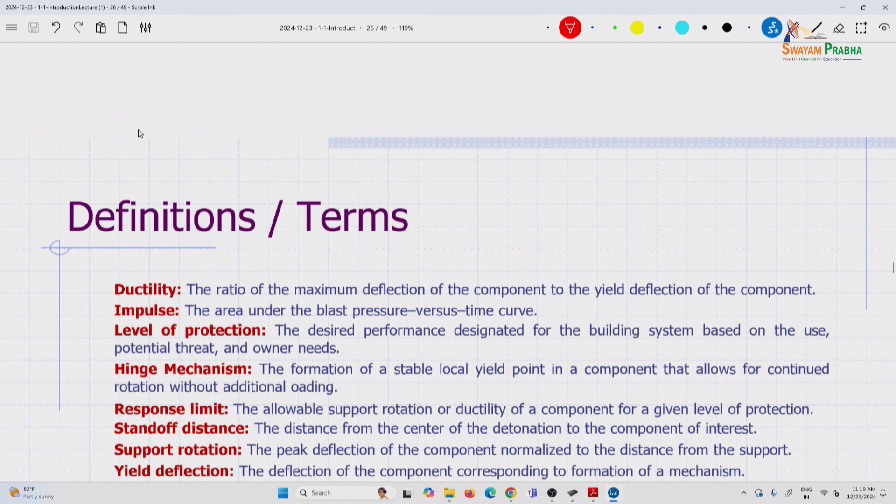All right, welcome back. So this is actually a very important slide with lots of terms that you'll hear over and over again.

So we've looked at the definition of ductility, but the way ductility is defined, in this case, you see that if you have any structure, let's say this is a load versus deflection response, whatever be the type of load, it's not necessarily dependent on the type of load. So if the response is something like this, then you have your behavior, again it is on the response of the structure.

You can also predict these responses, so whether it is experimental or predicted, either way. So you have this, we will call it delta yield, and this is the maximum that it can withstand. Here we will use the ductility as mu, which is delta max divided by delta yield.

So that's the definition of ductility ratio, and you can have this for even concrete structures, and for masonry type structures also, although the ductility ratio, as I said earlier on, concrete and masonry don't have a well defined maximum deflection. So in those cases we go into support rotation, which we will address later on.

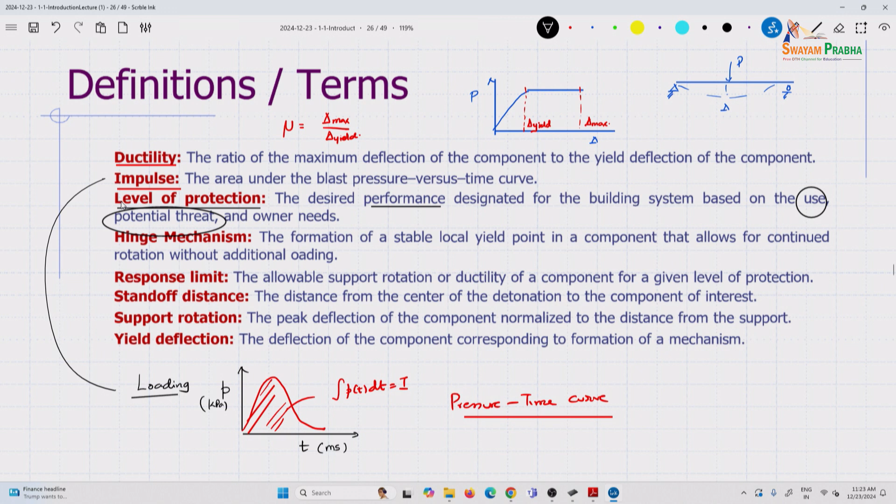And that is a part of our afternoon example as well as your tutorial, and owner needs. We will, at least from our engineering perspective, define what the threat is, and based on that threat you can go with levels of protection.

Then hinge mechanism. This is very standard, as you see in all steel structures, even concrete structures. You can have formation of a plastic hinge. I think this is something all of you would be quite familiar with.

Then you have response limits. So just like serviceability criteria, you have delta dead load should be less than the span divided by, I don't know, at least in the US we use dead load plus live load is L over 240, or delta live load is less than L over 360. In this case, the response limits are the actual rotation or ductility.

The support rotation, as I am coming to it later, but let me give it, we will call it theta, and the ductility is mu. Mu would be applicable especially for steel type of structures. Theta would be more applicable for concrete type of structures.

We have seen what the standoff distance is. That picture did not come out very well. All buildings, as you will see, let us say this is your building and this is your explosive. The standoff threat distance is the perpendicular distance between your explosive and the building, and of course that is how you design it.

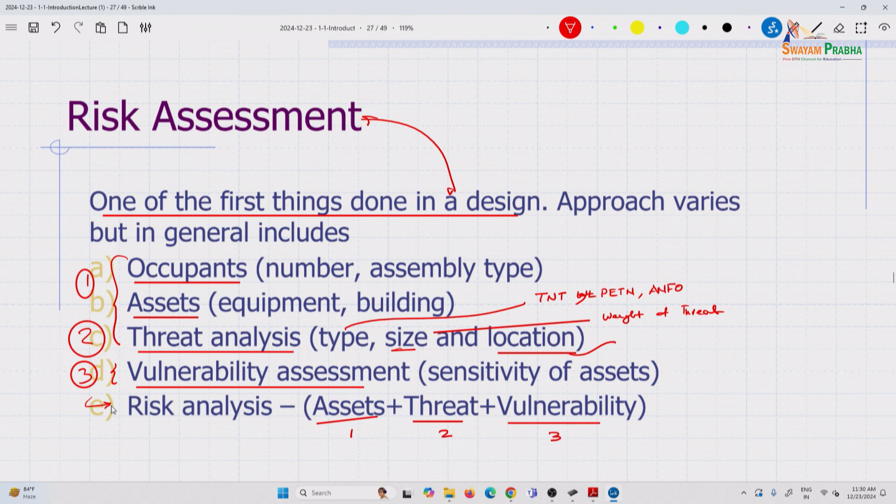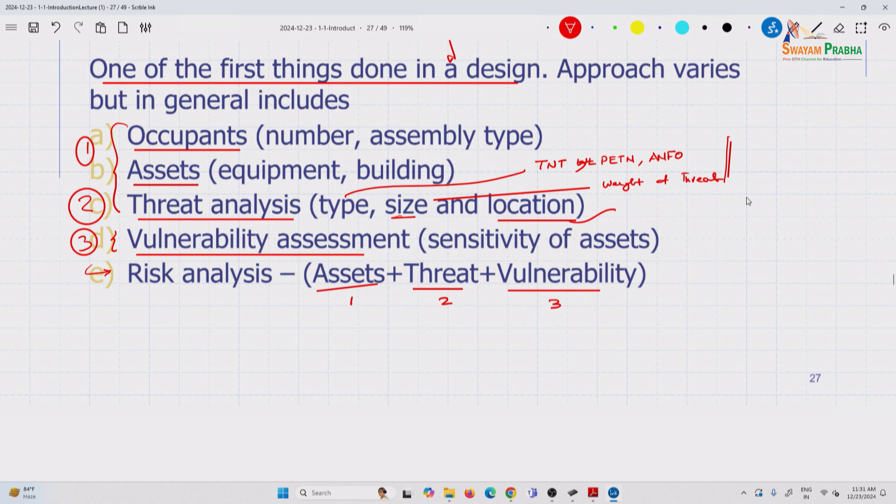But before we get to that, there are a lot of other things to look at. These levels of protection are classified under what are known as performance expectations, called LOPs. As you begin to see the distinction, the first thing is defining the threat, then vulnerability comes into play - the LOPs is a part of the vulnerability assessment of the structure.

It is part of the risk analysis. So there are, how is it classified? Just like in seismic, you can't have too many categories, it is quite broad based, and one person can do a different analysis compared to another - so there is subjectivity involved in this.

So you have low and medium LOP, we call this LLOP or MLOP. This is major damage - when you have a low level of protection, you can expect much higher damage, so there is major damage to the building. Then medium LOP is moderate damage and it is repairable, and then you have a high LOP which is repairable with very minor damage. This is of course much more costly - cost considerations definitely. As you see, going this way, you have increasing cost considerations.

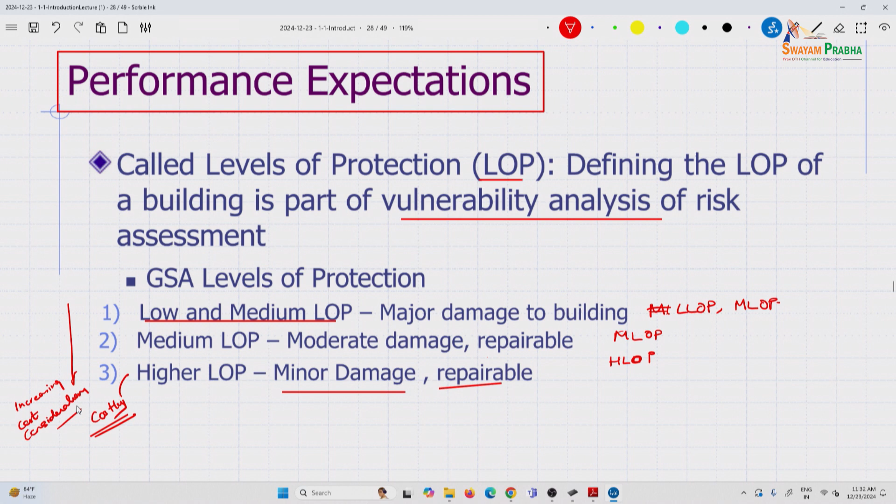So this is the document from the UFC 4-010-01. You have various levels for new and existing buildings.

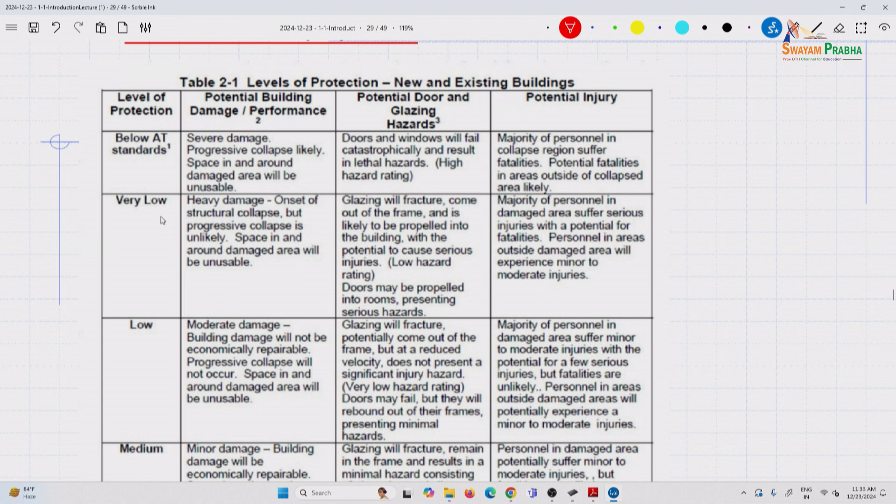As you see, this is levels of protection below anti-terrorism standards, and it defines the building damage performance, what can be expected from very low. There is also a very low category, low, medium. So you have here VLOP, LLOP, and these are distinct.

So there is a broad basket classification of what you can expect. For example, in high LOP only superficial injuries are likely, whereas in low LOP the majority of personnel suffer minor to moderate injuries. So being familiar with this is important.

If you see a low LOP, it does not mean the building or the personnel inside are not protected. Here, if you see, the damaged area personnel suffer minor to moderate injuries, with potential for a few serious, but fatalities are unlikely. So this is LLOP.

So here, of course, below anti-terrorism standards, even in the lowest category, this is very low protection. The majority of personnel suffer serious injuries with the potential for fatalities.

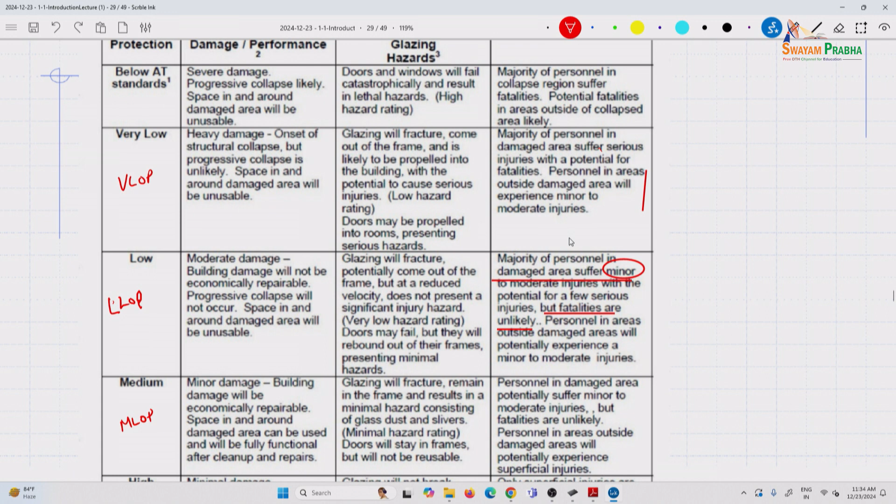Areas outside the damaged area will experience less. So in the vicinity which experiences the peak, you can expect fatalities. Outside of it, probably not.

So be familiar with what is contained in some of these charts.

So what are the overall analysis and design steps? Defining the parameters: threat, basically the size W and location. R is the standoff distance. So those are the two things. This is what is known as the design basis threat, DBT, as I mentioned earlier.

Then based on the DBT, once you have these two, we'll cover all this over the next few days. We define the loading based on the threat. Once you have W and R, how do you define a pressure-time curve for it, and how do you translate that to buildings as well?

I know one of you mentioned you're a mechanical engineer, and a lot of these are design basis, so we have to convert what you see physics-wise into civil engineering type applications. Thank you for mentioning that, I'll focus a little more on that side as well.

Then, once you have the loading, modeling of the structural elements as single degree of freedom, SDOF, models. This is also something we will be covering. We will go through all these steps perhaps in the first week, or maybe into Monday as well.

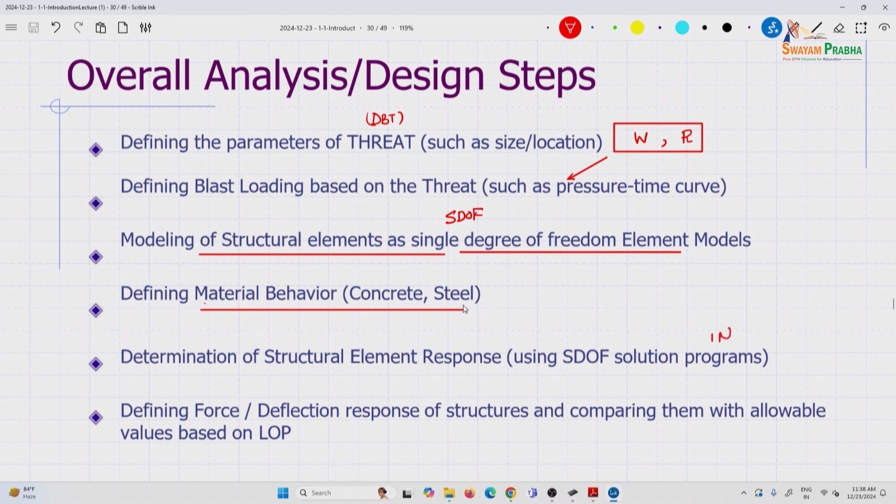At the end of the day, what we are doing is extrapolating. Those parameters are good for interpolating, but when you start extrapolating, you're on your own, right? So although it can be one of the most challenging aspects, for this course we'll keep it quite simple. Designers love to do that.

And then determining the response, and this can be either from an advanced analysis, using an SDOF solutions program, or performing advanced analysis. When I say advanced analysis, of course you're using finite element methods, and then you're defining a force-deflection response.

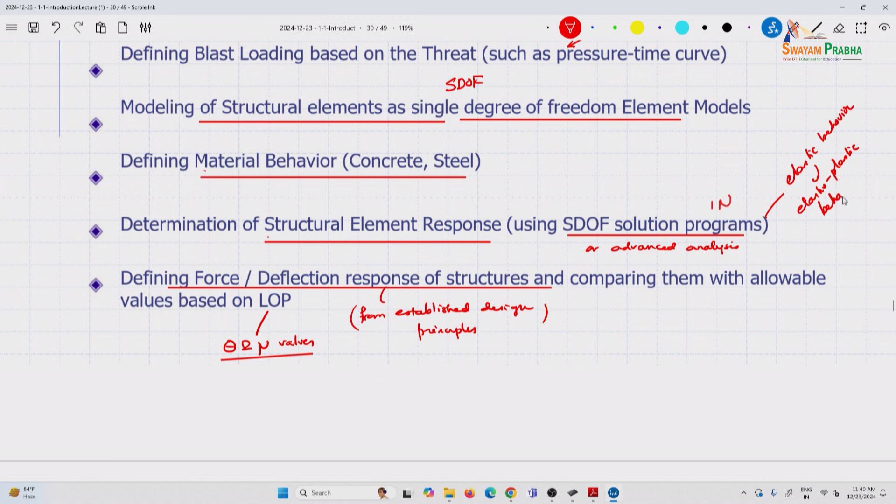So I think in all of this it's good to consider - and once again a disclaimer, I am not an explosives person. I collaborate with a person who works in mining engineering, and all they do is study the physics of explosions under whatever conditions. But given that, in this area you need to know at least some basics.

Physical sources are CNG cylinders, of course, that we know. In fact, we will see later on that the progressive collapse in fact began from a cylinder - an LPG cylinder blast, not CNG, that was an LPG cylinder.

And it collapsed an entire multi-story building. It happened at some floor well above, and then you can see how the collapse occurred. So that is something that led to progressive collapse. We'll look at that later on.

So that is either cylinders or a violent mixture of chemicals, and some of the most common is ammonium nitrate fuel oil.

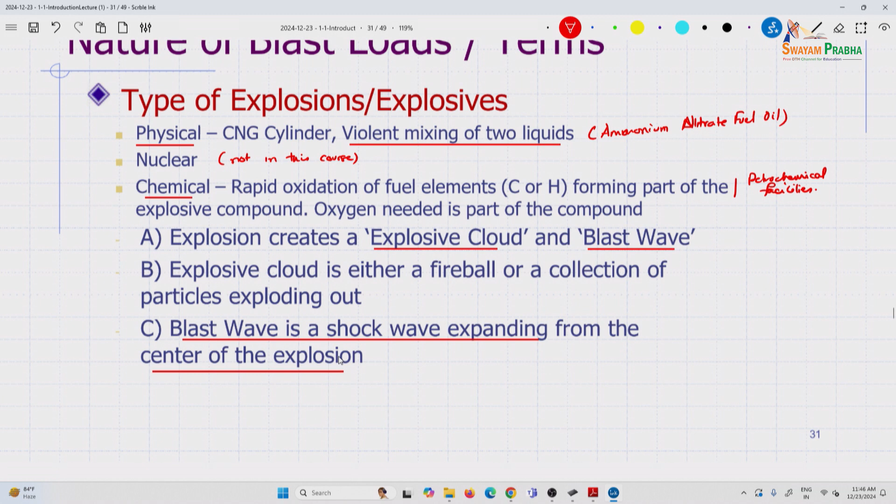Explosive, then the blast wave is a shock wave expanding from the center of the explosion. So there are categories of explosives: homemade or military grade. Homemade, for example, ANFO, and obviously they will be limited. The Oklahoma bombing, I showed you a picture of it, this was homemade, and we saw the amount, but that is not purely because of a blast, it's part of it, and then there's progressive collapse involved also.

And then of course you have military grade, and even in military grade you have a couple of different varieties. You have low explosives and high explosives. So we call this LE and HE.

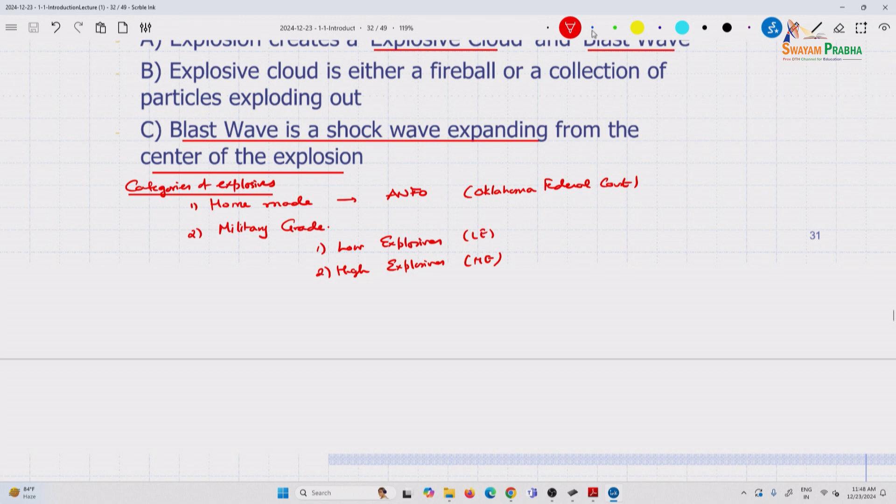Then even here there are two types of explosion. This is an explosive, but when you look at the explosion itself, one is a deflagration. In this case, when you are mixing these two, there is detonation, and there is a rate of detonation, it's a chemical reaction. In a deflagration, the rate of detonation, the velocity, the speed, is lower than the speed of sound.

And then you have the LEs. In this case, this is a little bit higher, so there is a rapid burning and flames involved, and sometimes it's difficult to put a number to it. It's often a range that is specified, whereas HEs cause what is known as a shock wave. When you have burning, pressure builds up and goes down, so the time over which it occurs is much larger. Whereas with HEs, the time at which the detonation occurs is extremely high. So that is the difference between what is categorized as HEs and LEs.

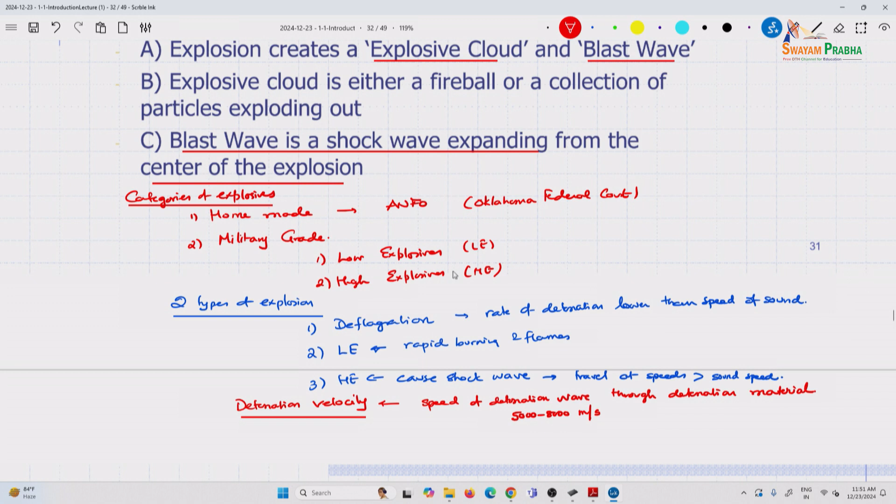HEs in particular cause heat, a lot of heat, then of course a large amount of energy, and it also creates strong blast waves.

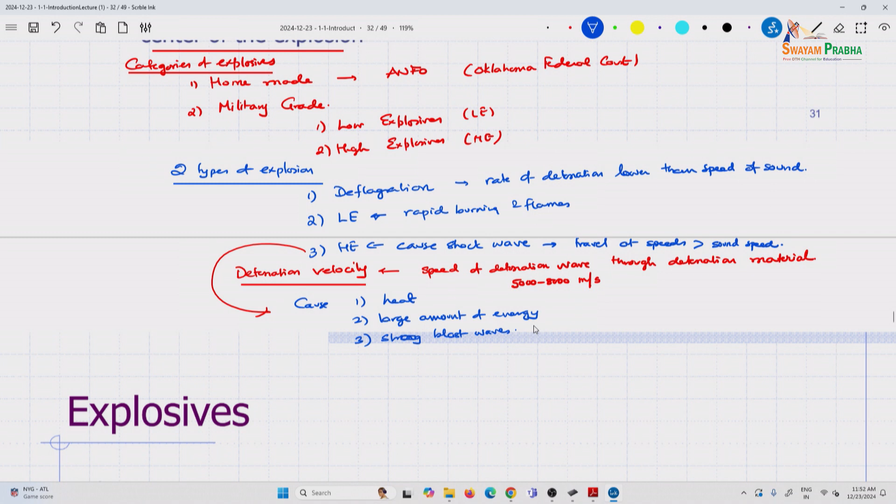So we'll go a little bit more into it now that we have an idea what they are. HEs, high explosives, are bombs, mortar shells, even bullets, for example, are considered.

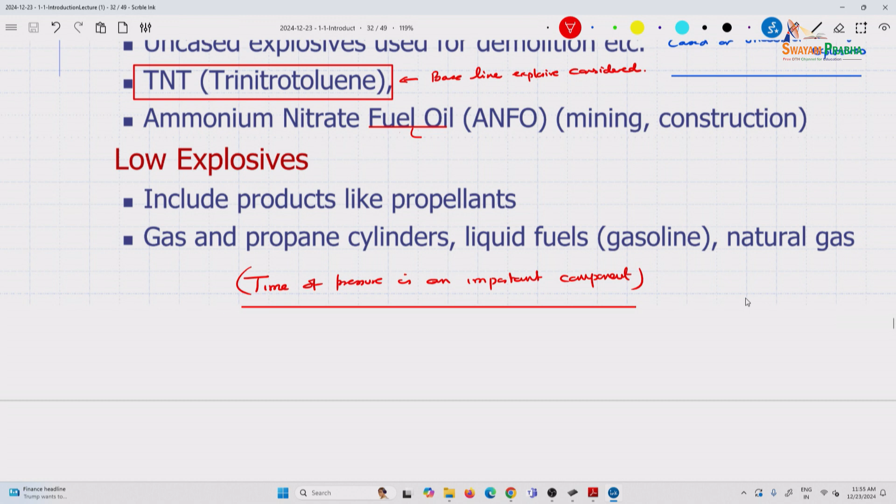Unlike any other type of loading, some of the principles from this course are fascinating even if you never work in this area — it's exciting to see structural behavior from this side. I was never exposed to these kinds of behaviors and concepts in my graduate, PhD, or even undergraduate studies. It's hard to cover these things in a curriculum, so expect to see them over the next few days.

High explosives release energy by detonation. Just to give you an idea of the energy, let's call it Q, the specific energy — measured in kilojoules per kilogram of explosive. For TNT, it's approximately 4500 kilojoules per kilogram.

Then there are others — for example, one explosive is higher, about 6400 kilojoules per kilogram. There's another explosive called RDX. Don't ask me who uses what, under what circumstances, and why — I go by what's in the literature for different types. So if you're asked to design against these, knowing these numbers or finding a table from your sources is important.

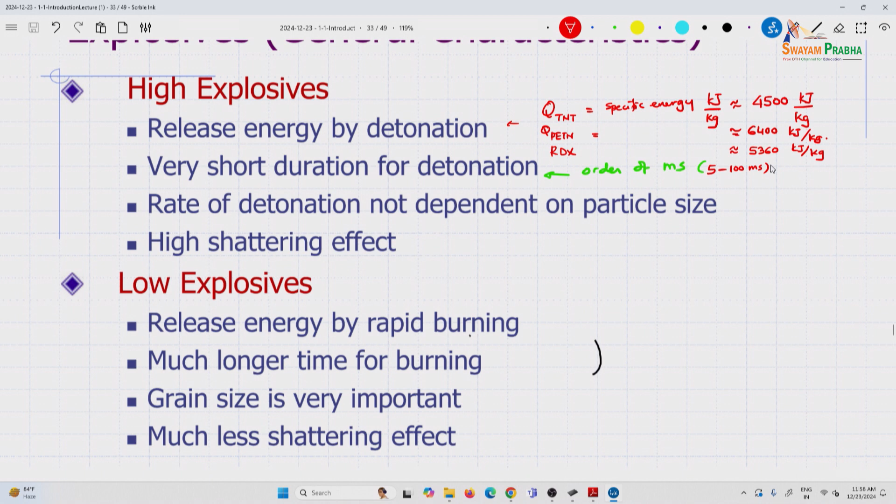The rate of detonation is not very important, not dependent on particle size. It does have a high shattering effect. The main difference is release of energy by detonation versus release of energy by rapid burning — that depends on the amount of oxygen available for burning.

Rapid burning happens over a much longer time, on the order of seconds. So the pressure generated has to be applied over a longer period, even 10 to 20 seconds. Later on you'll see how that plays into the response of the structure. There are some really fascinating aspects in this course, especially early on, that I'm excited to present and that you'll be excited to learn about.

Grain size is important too — within the detonation or explosion itself, it has much less shattering effect. This is more like prolonged exposure to load, not exactly wind, but something like it. Pressures are very, very high.

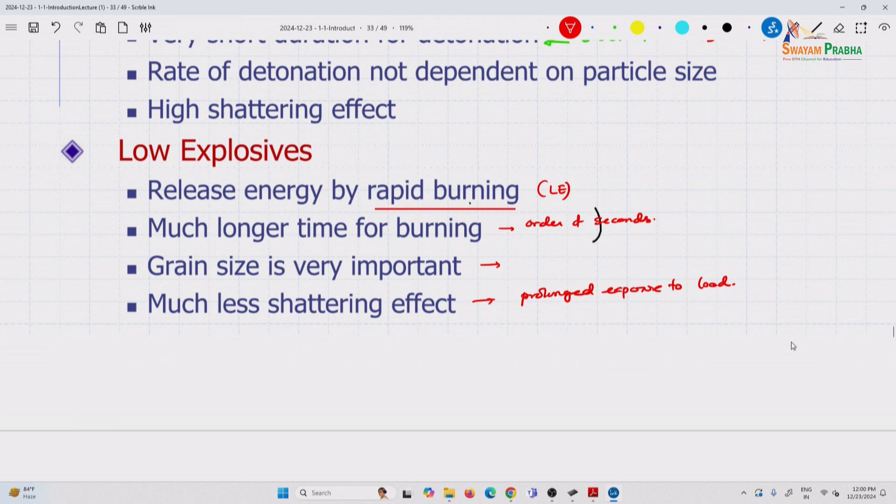Let me think in terms of PSI rather than MPa, just to get the order of magnitude. Say you're designing this building, this classroom, for a certain load — if you were designing the wall for a blast load, what is the ratio of the pressure difference? Just the magnitude of the pressure difference, what do you think?

Consider bridges fully loaded with trucks back to back — if you calculate, they'll be on the order of even less than 1 psi. For example, we design for live loads of 200 pounds per square foot; let's put it at 144 pounds per square foot — how much is that in psi? 1 psi, right? So compare that to tire pressure — maybe in MPa. Do you have any idea how much? Have you filled air in your tires? About 30, how much?

33 psi. What is the load on a building? Less than 1. So look at the difference in that, and that explodes out, right? So start thinking in terms of that shift, in terms of scaling.

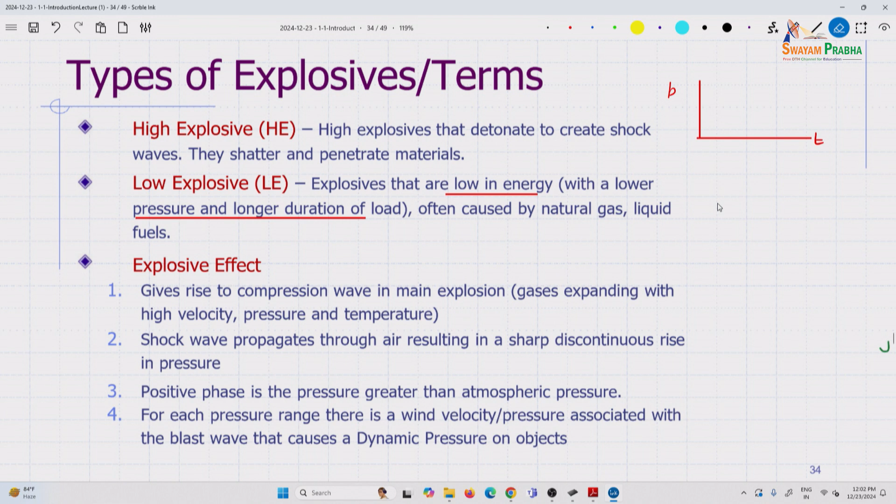So for example, if I were to plot these two, pressure versus time, I can plot them in the same graph. This would be more like this, where this is HE, whereas this would be LE. So you see the areas could be the same - this is the area under here. But the peak, there are 3 variables involved, and we'll talk of all those.

One is dependent, of course, and so how that affects the response, those are the things we will be covering. So what happens, what does happen physically, what happens in an explosion? Let's say you have a TNT explosion here.

Instantly it gives rise to a compression wave in the main explosion. So there's going to be, just like sound, right? Sound travels - I'm giving a compression here, and it travels to you in the form of sound waves. So in a similar way, there is instant compression, and not only that, there are gases involved. I'm not pushing out so much, just a sound wave, but here you have gases expanding with high velocity, pressure and temperature.

So this results in a shock wave. Instant rise is the shock wave. It propagates through air, resulting in sharp discontinuities. So when you saw the picture, you saw it goes and instantly comes - those discontinuities, and then that's the positive phase, where the pressure... so you actually have your atmospheric pressure.

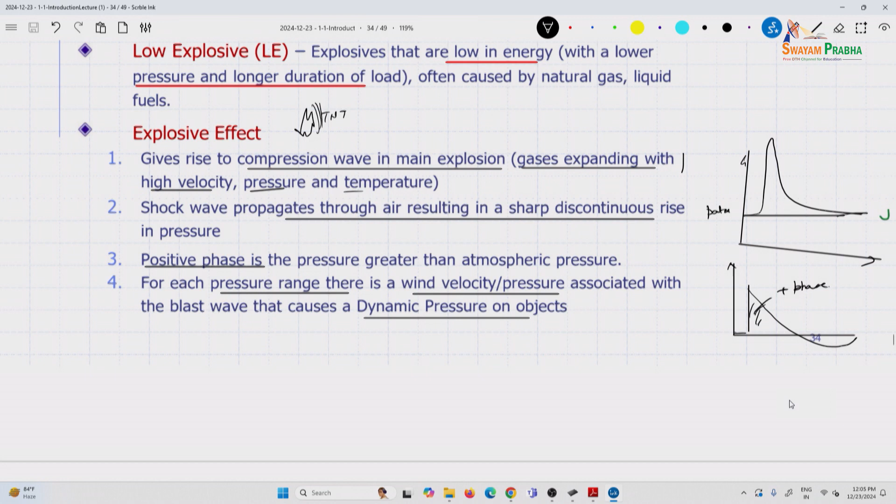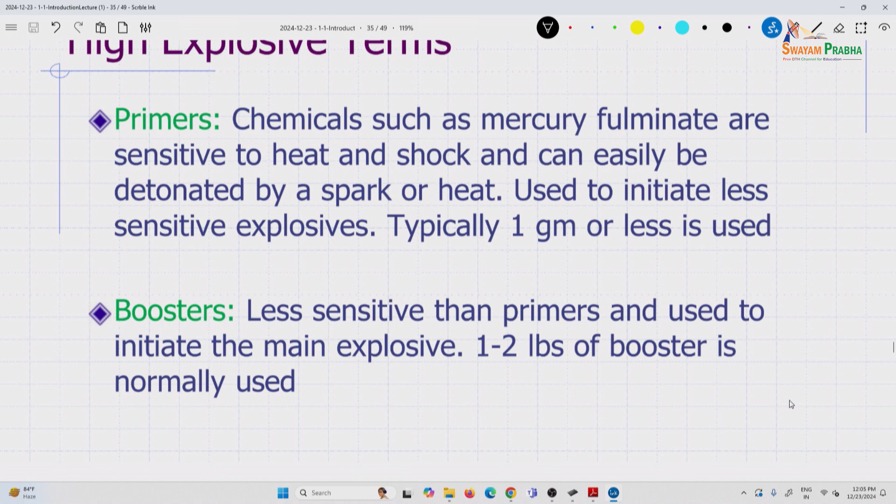This is something I do not really focus on, but just for you to know, you have different types of chemicals, primers and boosters. So we will not spend time on that.

I think we have talked about this, but let me just give you a little - I wanted to put this as a review, so to speak.

So with the booster you have a compression wave. The compression wave, we have seen, goes at the speed of sound. Then if the compression is sufficient, the chemical initiation of the chemical reaction will occur due to elevated pressure and temperature conditions. We know those are needed for chemical reactions to take place.

That is one way, and the reaction is very rapid, which causes a detonation wave. Then the detonation wave goes through the material itself in excess of the speed of sound, depending on what type of explosive material you are using. We have looked at 2 or 3 different names, we have not looked at them in detail.

Then that wave from the material reaches the interface between the explosive and air. So that is where the gases then expand with high velocity, pressure and temperature, and the boundary between the hot compressed gases and air is defined. Then behind this boundary, pressure and velocity sharply decrease after it passes through.

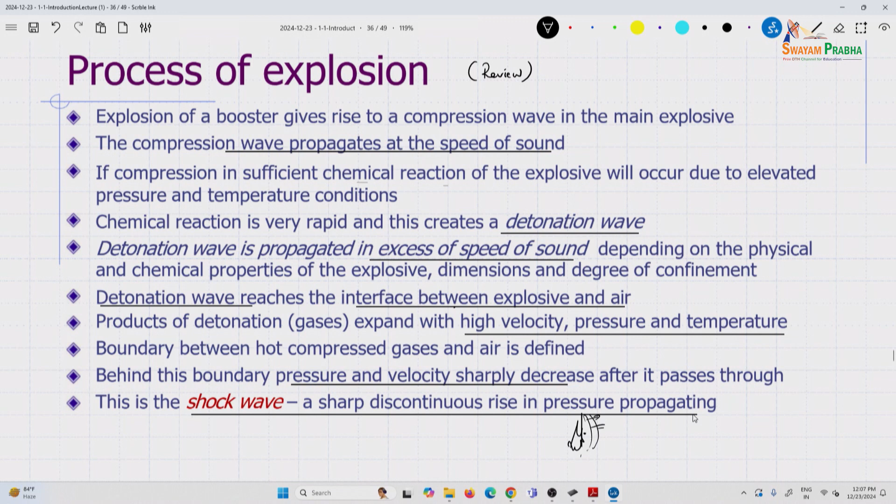So this is your explosion - let's say this is your boundary, and then the wave goes, and after it propagates in this region, it drops down very quickly. So this is the shock wave, and there is a discontinuity associated with the rise in pressure propagating. Do not ask me too many questions on this, I might not have an answer, but you understand the basic process, right, at least aware of it.

So shock waves are large amplitude pressure waves produced by an explosion and faster than the speed of sound. A blast wave - this is the dynamic - again, some of these are just to review.

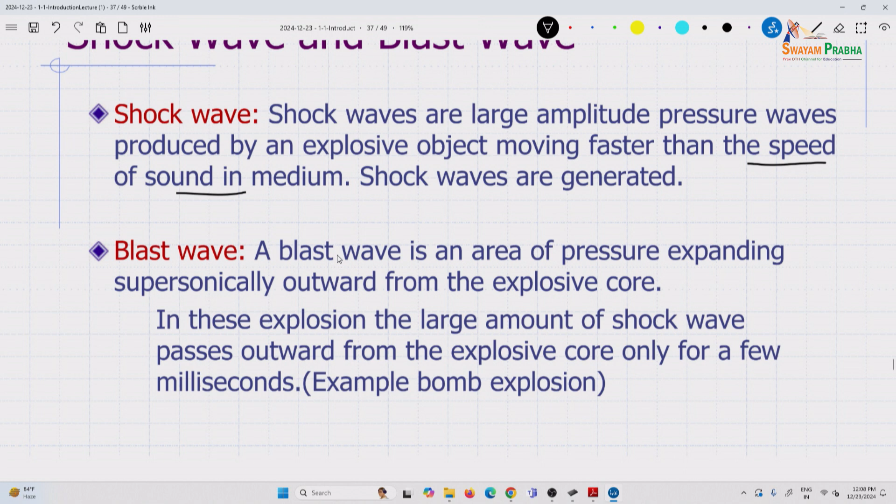In these explosions, large amounts of shock wave pass outward from the core in a few milliseconds. What are the magnitudes of pressure that is generated? What are we talking about in this case? This is extremely high. Gas pressures can go 10 to 30, not just megapascals but gigapascals, but luckily by the time it arrives outside into the air and comes into the structure, it falls down into megapascals, but they are still very high.

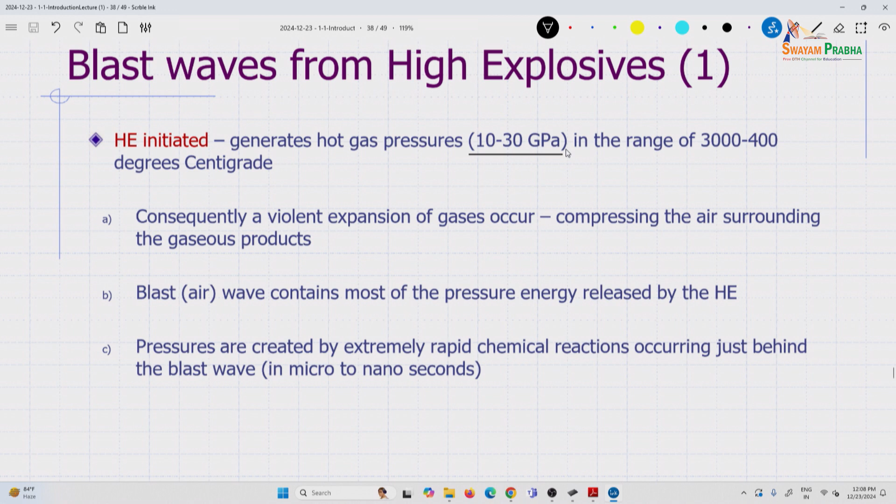I think most of it we have covered, we can move forward. I will give you all of this, you can read through it carefully, but I do not see anything new in this. Once again reviewing the two things we have talked about in terms, we have talked of deflagration.

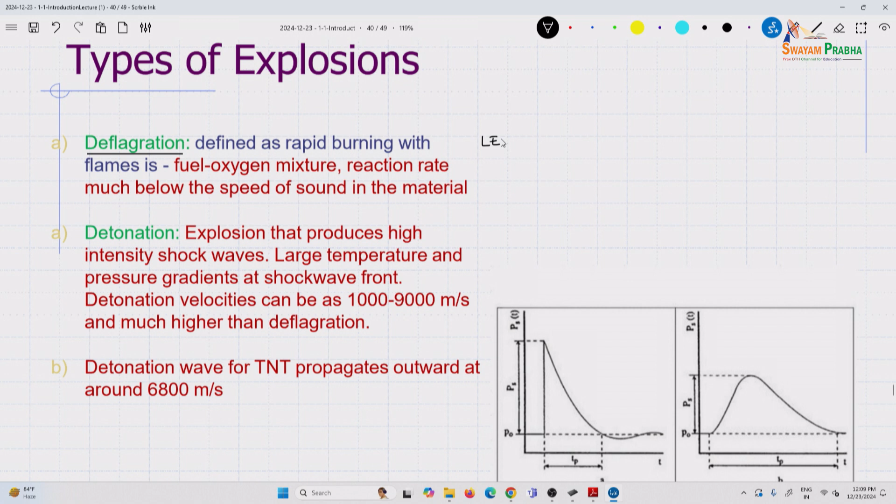This is again in low explosives. Basically this occurs, and if you look at it, this is the pressure time curve for deflagration, and these could be of the order of 0 to 10 psi peak pressure. Whereas here, detonation - this part is the detonation - this can be of the order of about 50 to, in our experiments we almost went even more, 100 psi. What is 1 ksi? About 7 megapascals. So you can imagine this is 0.7 megapascals or half of it.

Explosion that produces high intensity shock waves, velocities - this is something we calculate. We'll see later on in buildings, it is important to note that the detonation velocity itself is not important, but the velocity of propagation can be important.

Note some numbers - this is at 6,800. So when you do calculations, you're asked to, nobody is giving you answers, especially in this field. In a lot of other books, you can turn the page and find an answer in the back and feel good that you've done it right. But in this field, there are no answers. You only have to gauge yourself. So how do you know you're right, or at least in the ballpark? Looking at numbers and units. That's why I'm highlighting some of them.

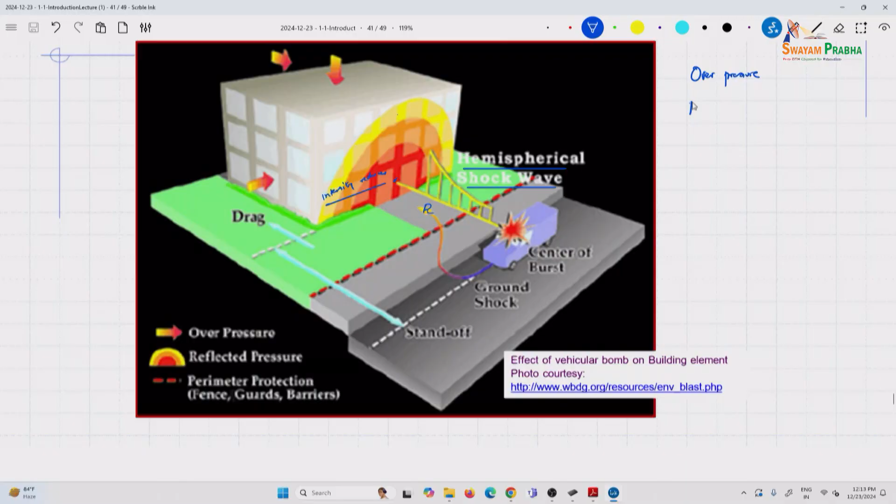So if you're overpressure, it's called PSO, or this is PR. Reflected pressure can be much more than overpressure - orders high, not just 1.2, 1.3, it could be 5, 6, whatever the case may be. So in the front face, this is the front face, and we will do examples of all this - you see that you have overpressure, and so you have PR. PSO is in air, but reflected pressure is in the front.

Now on this side, then there are these structures. Actually, if you take a circular structure versus a rectangular structure, and then there is blast - this is blast. Now this tends to reflect back, this is PR. Now here there is diffraction. We do not need to specifically go into it, but the behavior is going to be very different. So that is why it is recommended - it is sometimes hard to predict what happens due to diffraction aspects of it.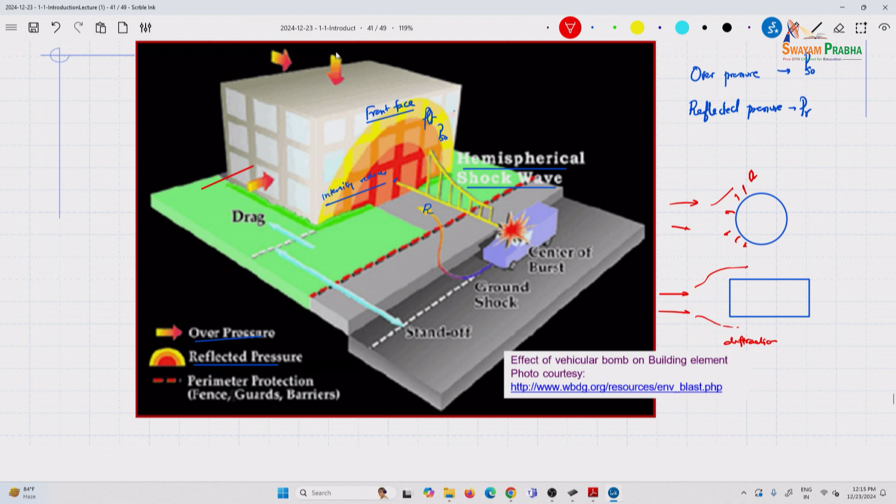So here, now notice everywhere it is into the structure, and these are just overpressures. We called it PSO. This is PSO. This is PSO.

This in the back wall is PSO, so only the front face is experiencing it.

So when you are designing anything, and this applies to any mechanical structure, imagine any structure you want to resist these effects. You should recognize that is why you analyze bomb effects in different locations, because you want to protect everywhere. Like let's say it is an armored vehicle, then you analyze where it is, but recognize that depending on where it is, you have reflected and side-on pressure. Is that distinction clear?

What is the difference between the two? So overpressure, let's say this is the structure. Detonation is just, so up to here it is overpressure. Then once it hits the building, there is reflection. So the building is moving because of, if it is not stiff, less reflected pressure. If it is very stiff, but you will see that when we calculate it, it does not depend on the stiffness of the building. We will assume it to be a rigid structure. So that is what is reflected.

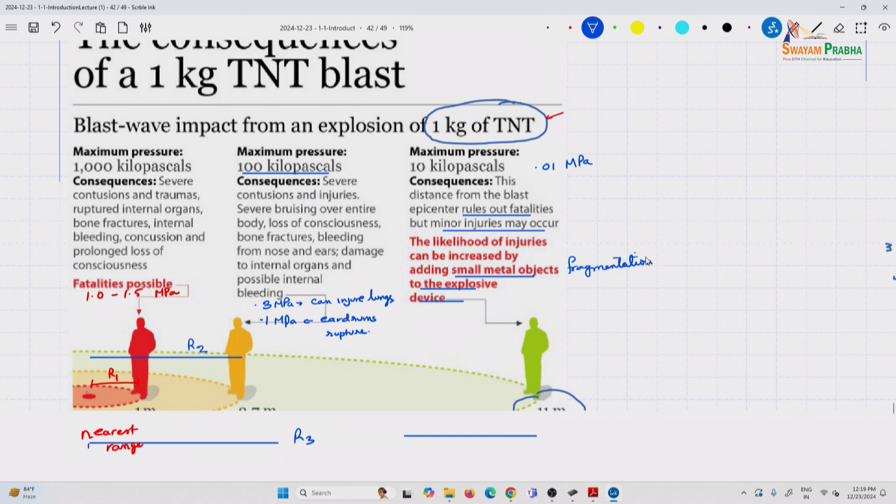So just to give some numbers to keep in mind, this is important especially if you are designing against, to protect. So there is designing to prevent, again levels of protection, but when you come to higher levels of protection, contents inside are human beings and you want to protect ears, what should you reduce it to? You reduce it, this gives you some ideas of the actual numbers. As you go along this course, keep these in mind, as Professor Aragappan said, but if you're taking notes, I would take notes on the numbers, those are more important.

Here is an interesting point, and should also mention that 12:45, no? No, what, it goes till? 12:43. Okay, we're going to be way behind, but that's okay, we'll go as we go.

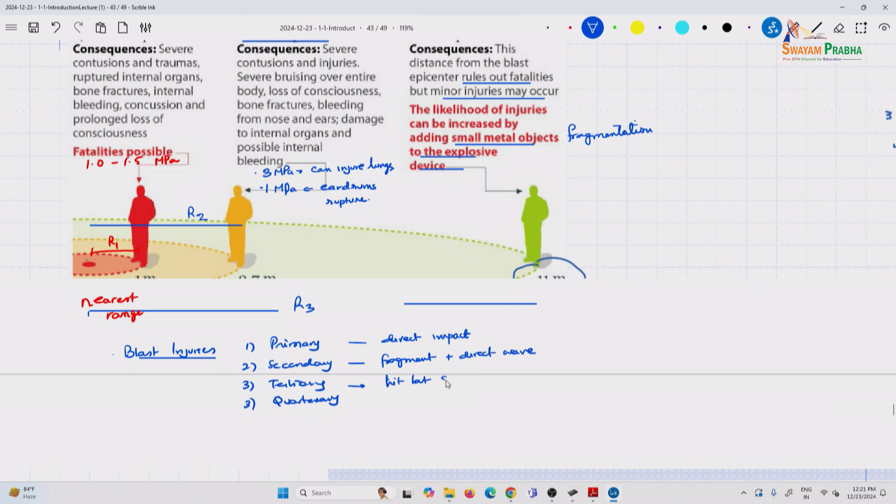So you have here blast injuries. They are primary, secondary, tertiary, and quaternary, fourth. Primary is direct impact, secondary is fragmentation plus direct impact, then tertiary is this thing hit by surrounding objects. That's why when you design, all these things matter, for example glass, that would be glass breakage. And then quaternary, these are from inhalation, these are biological effects.

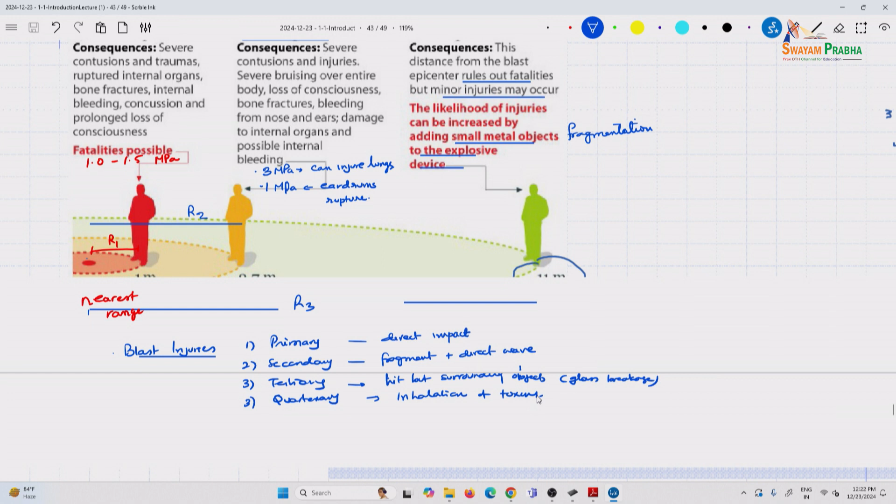So when you're looking at protection, you have to present a comprehensive package. As you're seeing, the picture is already broadened. What is surrounding? What is my glass type? All these, it's not just structure alone. So this is again from the UFC 3-340-02, we'll get familiar with this.

So here you see, this is your explosion at a height, this is the ground. Now what you have here is also called the incident wave, this is the first shock wave. And then of course the angle of incidence we talked about. Then what happens is the incident wave is coming, it comes here, and then what happens at the ground? Ground reflection, right? What does speed of sound or speed of a wave depend on?

In terms of medium, what metric? The density, right? So air has a certain density. Same thing even in seismic principles - if you have soft soil, your seismic wave speeds change rapidly. Same principle here: when it hits the ground, it reflects with much higher intensity.

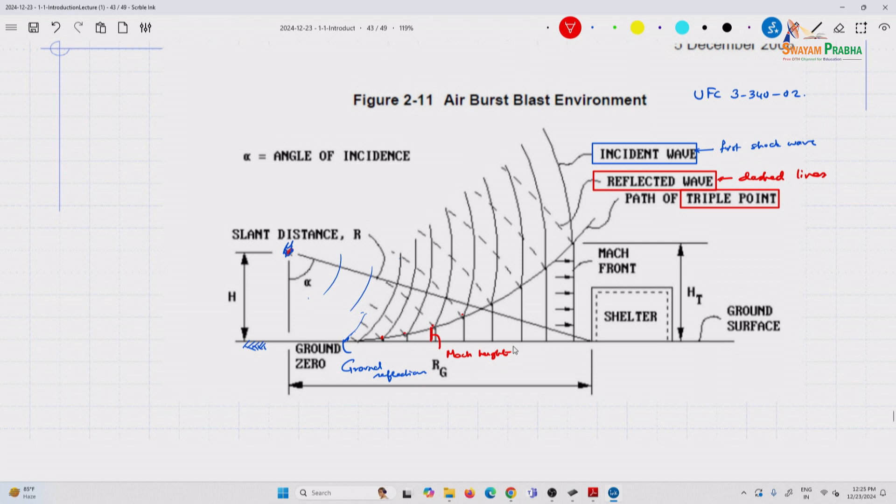The path of the triple point, and this height, is called the Mach stem. This phenomenon is studied in explosive engineering - if you're interested, you should spend some time looking into it. It was studied, these concepts were proposed over 100 years ago. Many of the equations we use are perhaps over 100 years old, if not more. I was talking to Professor Aragappan about the basic mechanics of understanding the fundamentals of these topics, because they haven't been studied a whole lot.

So that's what is called the Mach front, and it depends on where the building is, where it hits the structure. Fortunately, we are not going to be looking at some of these things in detail. If you are doing advanced modeling techniques like finite elements, you have to start considering, depending on the type of modeling you use, reflecting boundary conditions versus non-reflecting boundary conditions. But for this course, you don't need to worry about that, but you should definitely know these terms - the Mach front and the triple point.

The whole idea - it's difficult to design, but let's say an ideal goal is to design a structure to avoid the Mach stem. The Mach front or the Mach stem are about the same thing, and this is actually also called the Mach reflection.

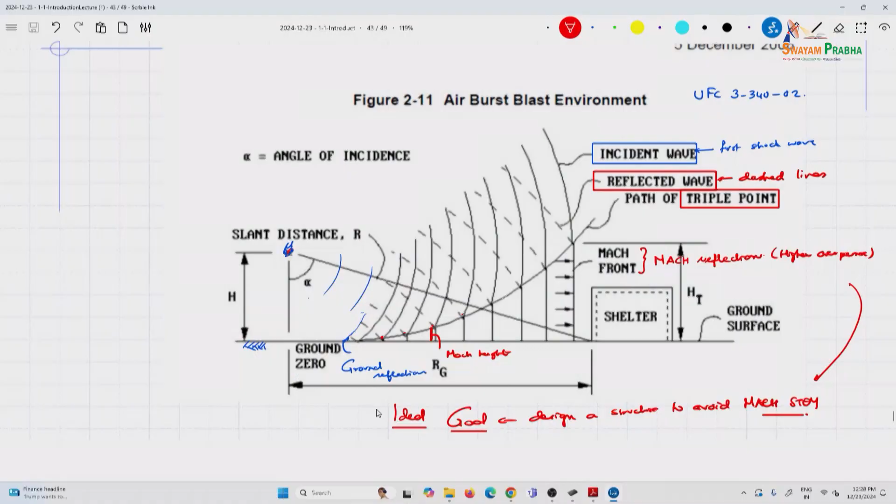That's why curved shapes actually reflect better. Convex shapes, as we suggested, reflect much better, but piers and columns involve both reflection and diffraction - anyway, those are part of regular design. So I seem to be talking a little ahead of the slides, but it's good to review.

So Mach stem formation occurs when a blast wave reflects off the ground and the reflection catches up with the original shock front, creating a high pressure zone. Anything in this area experiences peak pressures several times the peak of the original shock front - that's why you want to avoid it. So your side-on pressure can be much higher here.

A structure - and that leads to your question about whether you can calculate this. Maybe that's something this course has evolved toward; next time I should include some calculations. I'm not prepared for those now, but I think that may be a good example to add in the future, if the height of the triple point exceeds the structure height.

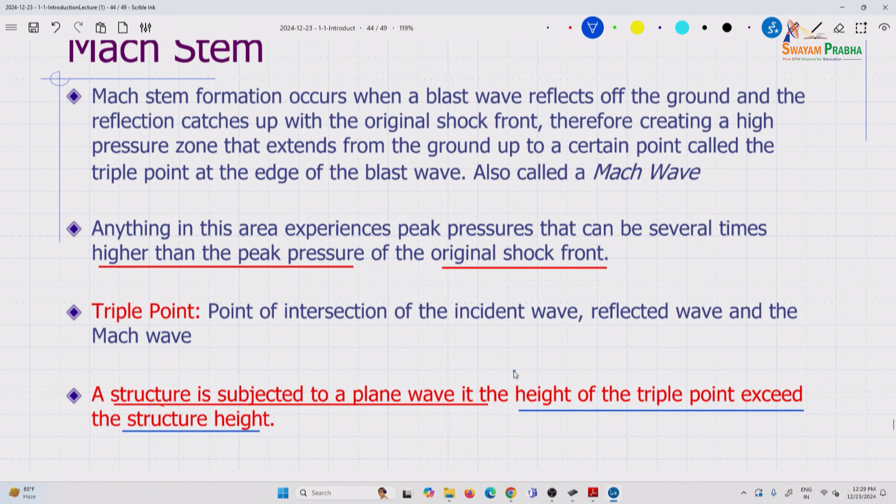So we've seen three things, right? Negative pressures also, because there's suction behind - those are the positive phase, then you have the negative phase, and we'll go through all of this. We've also talked about dynamic pressure, the pressure due to wind velocity associated with the blast wave. We'll see how to calculate all of these.

So again, your wind speed is calculated based on your wind pressure, based on the wind speeds. That's what this corresponds to, the particle velocities. What is your overpressure and particle velocities? So if you want, this can be used.

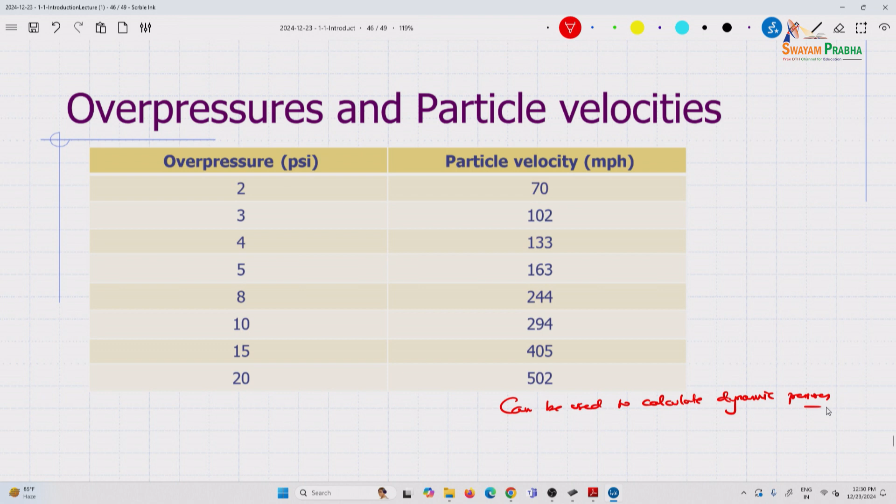But we will do failure overpressures for buildings. This is again from a published paper, I should perhaps have the full reference. So it gives you overpressures in PSI. Keep in mind 1 KSI is about 7 MPa. So if we think in terms of units, that makes more sense. So 1 PSI is how many? 0.007 MPa or 7 kilopascals.

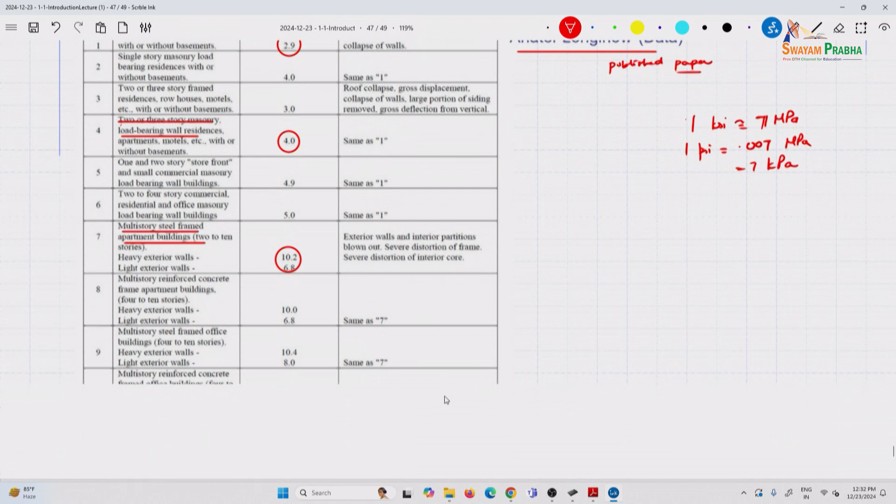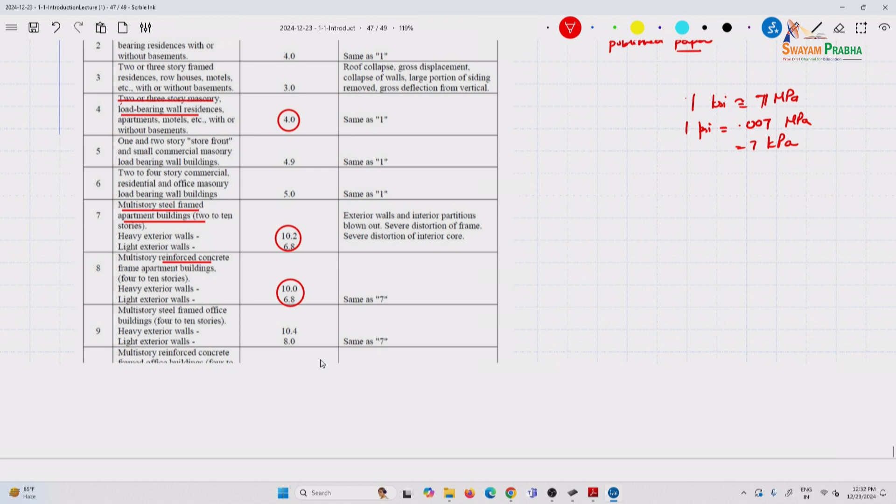Just to give an idea: two or three story framed residences with or without basements, overpressures of 3 cause roof collapse. Then 2 or 3 story masonry load bearing walls, overpressure of 4 causes roof collapse. Again, know what kind of pressures are acting on the roof. Store fronts, multi-story — somebody was talking about steel building applications — there you need about 10 psi to 6, and there is also a time effect we won't get into, this table doesn't speak to it. Then multi-story reinforced concrete frames, again 10 to 6, and the definitions are there. So all of this, you see, they start failing around 10 psi or so, and impulse is also another part of it, but you can look up that reference.

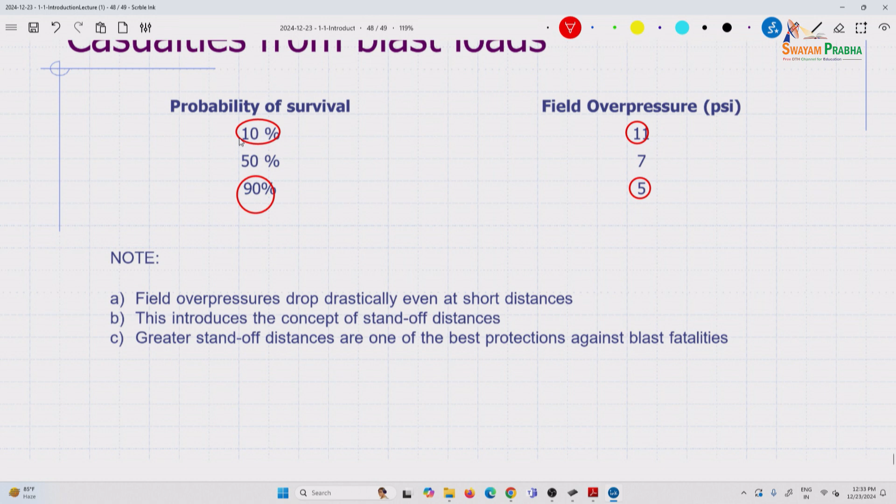And we also looked at some probability of survivals. We've not looked at the probability itself, but at the pressures that cause it. So you see, from 5 to 11, if you can drop that pressure by half — here, if you design to drop pressure in half — the probability goes up 9x. So hopefully that highlights why standoff distance is very important.

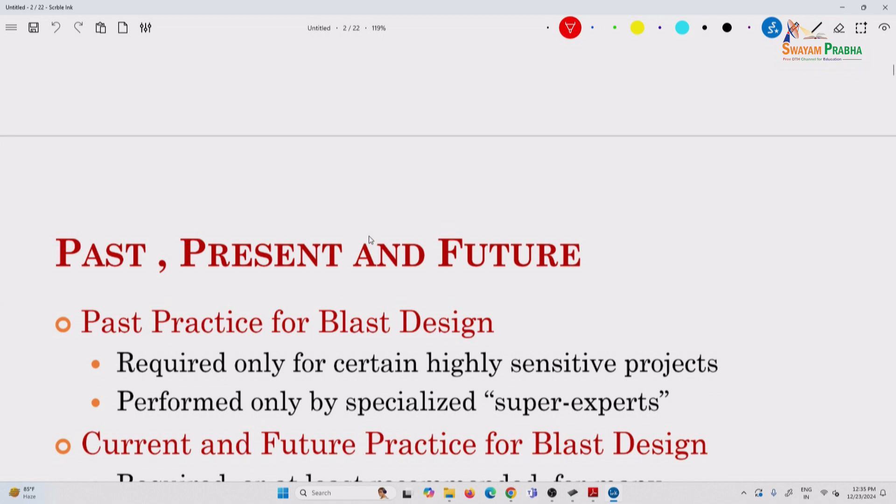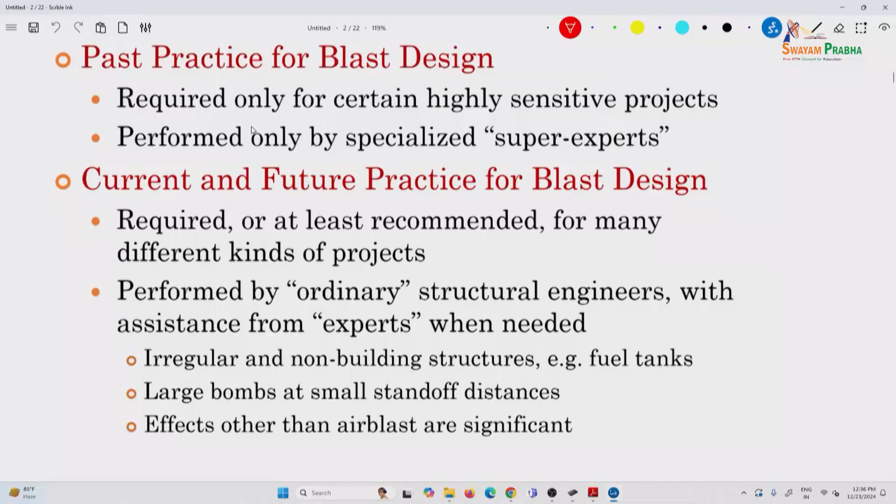So briefly about... a little bit of introduction again. This is probably the first time, or one of very few times, a course like this is offered. When we talk of the past, we are just talking of recent past. Even there, not many people — some of the students I have taught are now working exclusively in these areas, and some of them are not even from civil backgrounds, they have mechanical backgrounds, and they work for companies that do nothing but protective design. Specialized companies do that. So you should hopefully get a lot of fundamentals, although we focus on civil. So it is becoming a required area. I do not know how prevalent it is in India, but structures should be considered depending on their importance.

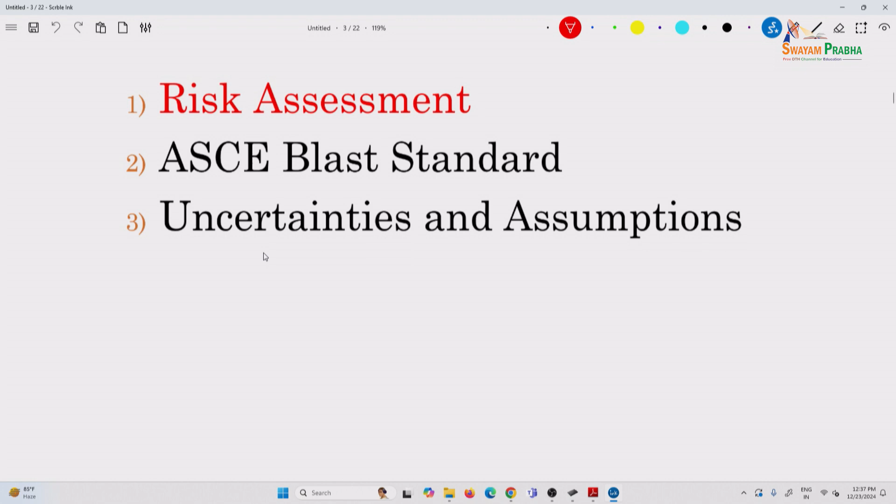Expertise is needed when you have irregular and non-building structures, again large bombs at small standoff distances, where effects other than air blast are significant. So what we are leading up to is risk assessment, and there is a standard as well — this afternoon session I will bring that document.

So the risk assessment — some fundamentals of risk. What are some common definitions? Again, you do not need to take down notes, we are going to give you all of this. Risk is basically: you have an unwanted event which may or may not occur, and you are designing for that. So fundamentals of a risk assessment are three things. One, that event has a cause — the cause is quantified through hazard analysis. Based on the probability of the unwanted event, which may or may not occur, you have a threat, so you do a threat analysis. And then the expectation value of an unwanted event you calculate — that is what you define as risk.

Now, what is acceptable and not acceptable risk? Those are dependent on your experience, your organization, your client. So this is basically the definitions. What are the basic components? Keep in mind, it is a subjective procedure.

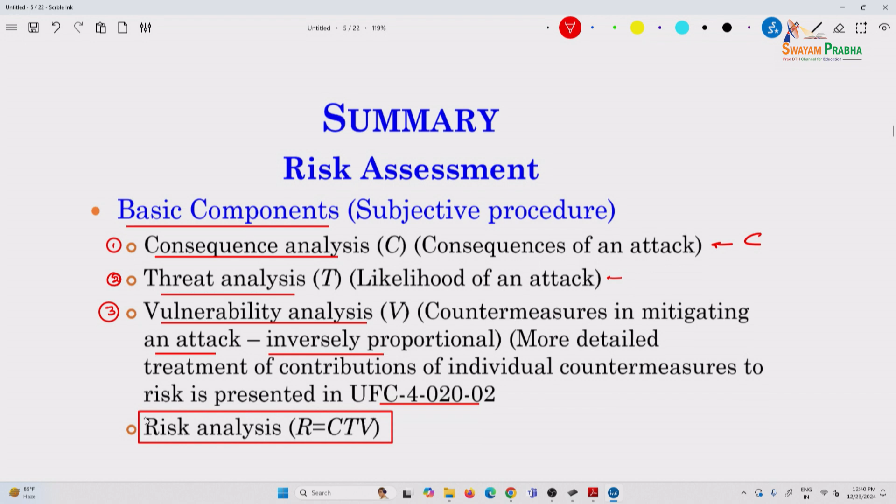And then finally, from the perspective of the structure, you have a vulnerability analysis. It is often called a CTV analysis, countermeasures in mitigating an attack. Then there is individual, it is presented in this document UFC-4-020-02. So then you have a risk which is nothing but can be defined as a product of C, T, and V.

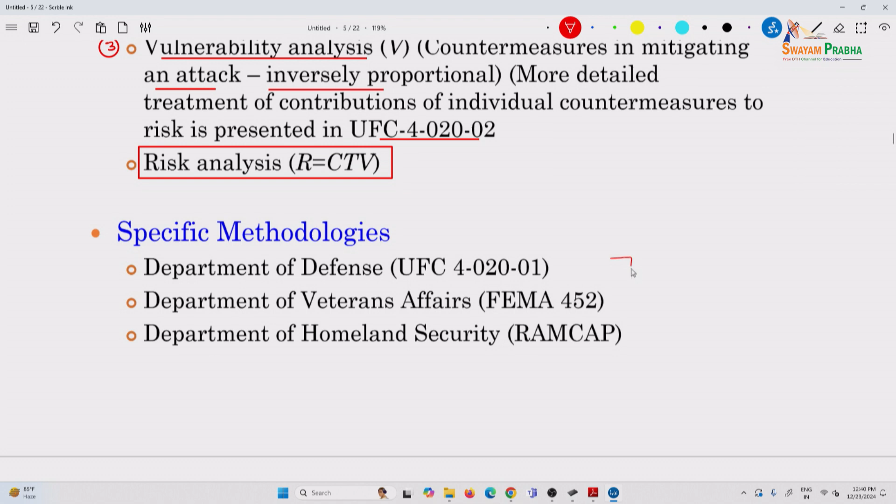So there are very different methodologies depending on the type of building and who owns it. Defense or veteran affairs, homeland security, they have their own, and we won't go through all of it, we will go through one of them.

Building codes, here the goal is life safety. You address usual occasional hazards, you have a return period, and basic loads are dead, live, wind, snow, earthquake. You can have hydrostatics, whatever you want, you are all familiar with it, and it is prescriptive. For example, ASCE 7-22 or ASCE 7, whatever year you use.

The word is standard, and it also includes minimum standard. It is not just a standard, I should say minimum standard. It is up to the engineer to use higher than that. So it is prescriptive, dead loads are 100 PSF, whatever, you know that for sure.

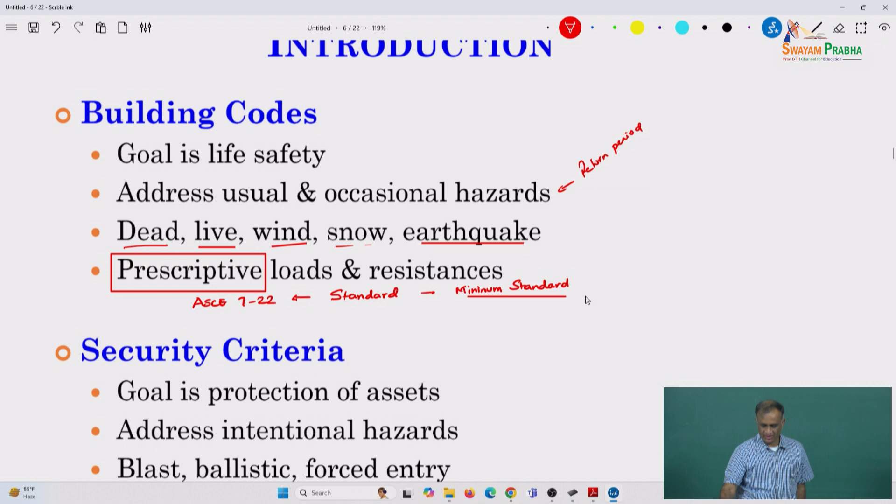But in security criteria, the goal is not life safety, here it is protection. Humans are also considered assets. So protection, address intentional hazards, and risk is based on loads and resistance. So this is prescriptive loads, prescriptive resistance. Here it is based on risk, so it is risk based, whereas this is different. Note the difference between the two.

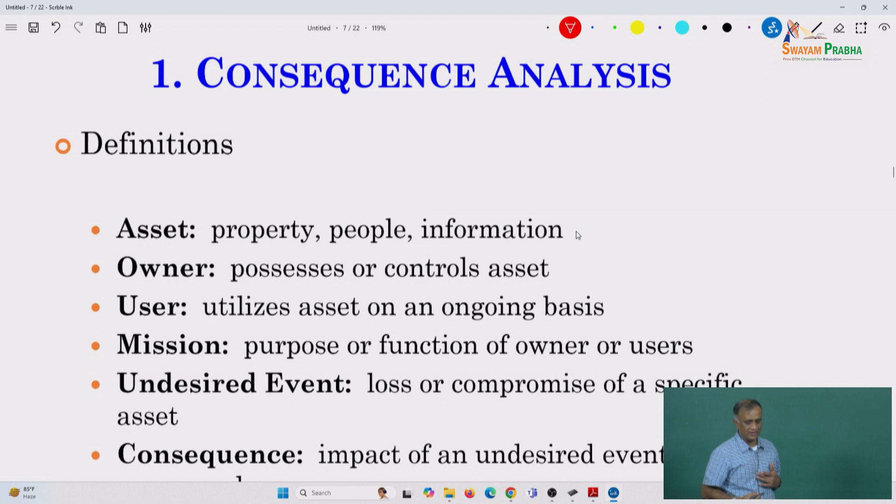So what are some of the things in a consequence analysis? Things you consider are assets, owners' assets, as I said, property, people. Information is also an asset, like law libraries or data centers now.

Especially now, I don't know how prevalent data centers are here, but you could convince a company, let's say Google or somebody like that, that data centers need to be protected against blast. It now becomes that data centers are part of many of these documents. This thought only occurred to me recently. Even they may not be aware that they need to be protected, because you have redundancies, but still you can consider that to be a potential for applications.

So it's up to the engineer to tell the owner who possesses or controls the assets. Owner is different from a user. Who are the people who are actually using that particular building? Then what is the mission, purpose or function, and then what is the undesired event? You have to define all of this as part of the consequence analysis.

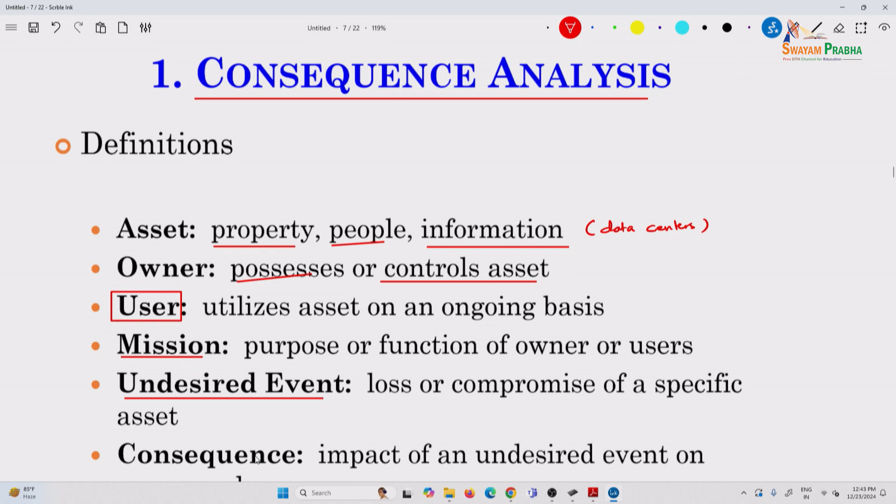Loss or compromise of a specific asset, and then the consequence is defined as the impact of an undesired event on owners and users. Loss of a data center, what does it mean to the user? User loses the life of the user of the building, whereas the owner loses value, property. They are two different losses.

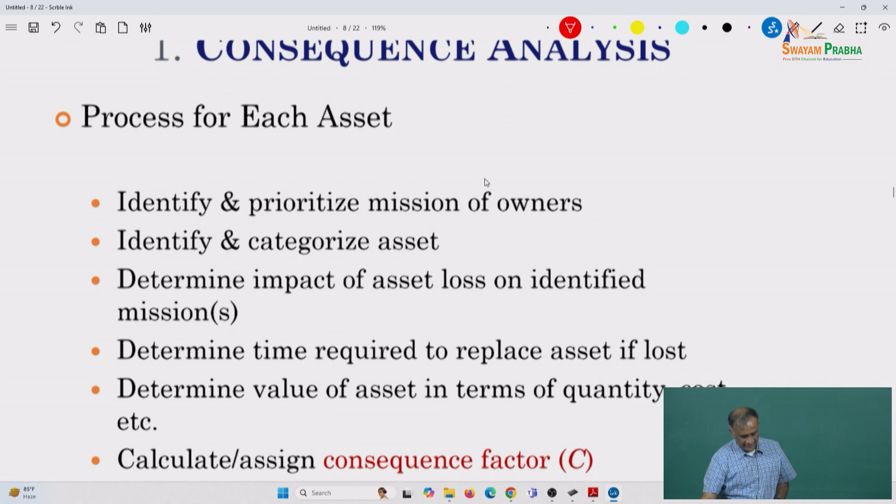Then for each asset you identify and prioritize mission of owners, identify and categorize the asset, determine the impact of the asset loss on identified missions, then the time required to replace the asset if lost, and then you calculate all this to get a consequence factor C. We will go through an example here. So a consequence analysis, this is one example, it is a very basic example. Again, it depends, it's very subjective.

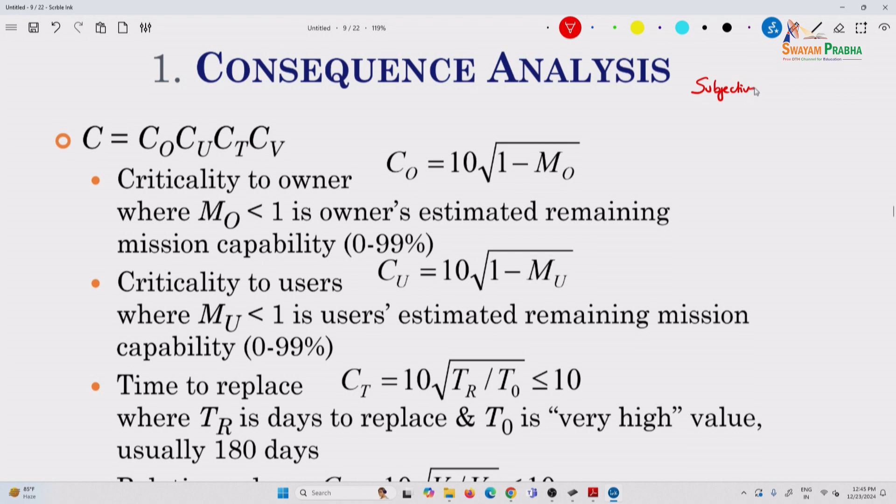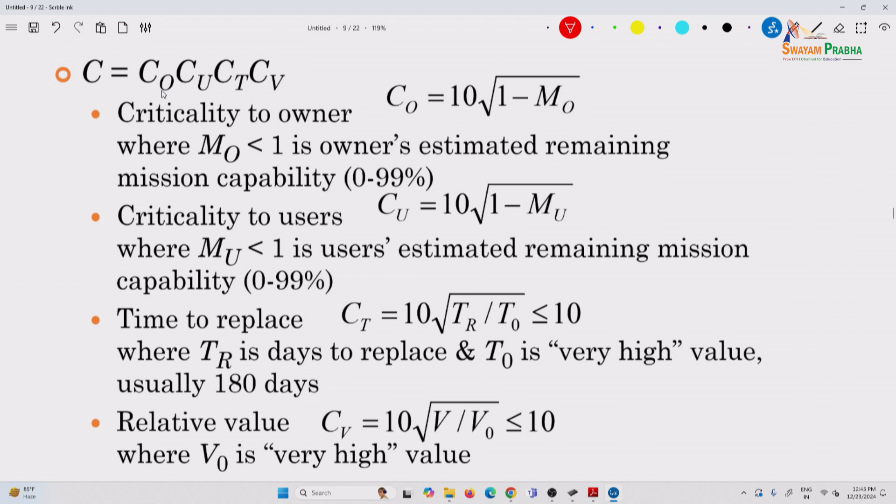If you were using a simple example, you define the four things that we talked about in the previous slide: criticality to the owner, and you can calculate it from this equation. So, it is the owner's estimated remaining mission capability.

Then the second thing is criticality to the users, again a similar equation, from a user's perspective.

Then the time to replace, where TR is, for example, a data center could take a year to build again and everything, and the days to replace versus a high value which is 180 days. Now you might change that, you might say a high value could be even lower. So, the keyword here is usually.

So, the relative value for the owner is calculated from that.

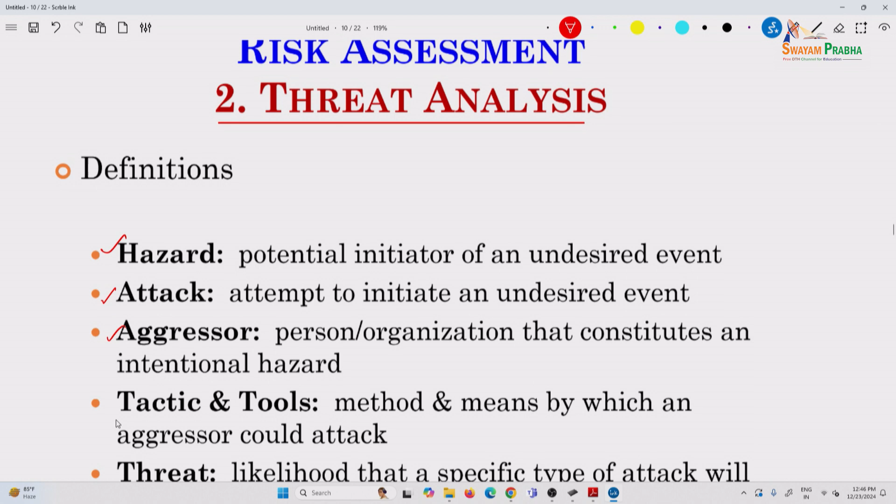Then we come to the threat, the second part of it is threat analysis. A threat has a hazard, attack, and aggressor. We will talk of some of these things even in terms of UFC, which has all these tables, tactics and tools. So, a hazard is the potential initiator of an undesired event, this is the explosive.

The attack is the attempt to initiate it, then the aggressor is the person, depending on who it is. For example, it could be a terrorist activity, it could be accidental. If you see in terms of protective structures for petrochemicals, that is accidental explosions. You won't call this intentional explosions, this is accidental.

So here you see they use the word intentional hazard. Then what are all the tools? For example, cars or walk, whatever capabilities they have, and the threat is the likelihood that the specific type of attack will occur during the planned service life of an asset.

So in the intentional hazards, you identify the aggressors, tactics and tools, whether there have been past attacks, determine if it would be consistent with the aggressors' objectives. Whom you consider to protect against is important. You won't protect against all aggressors. What's the worst aggressor you want to protect against?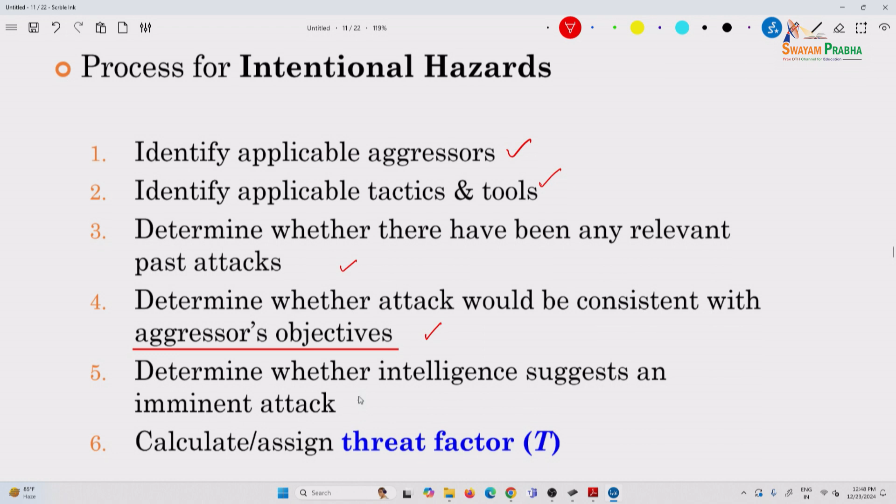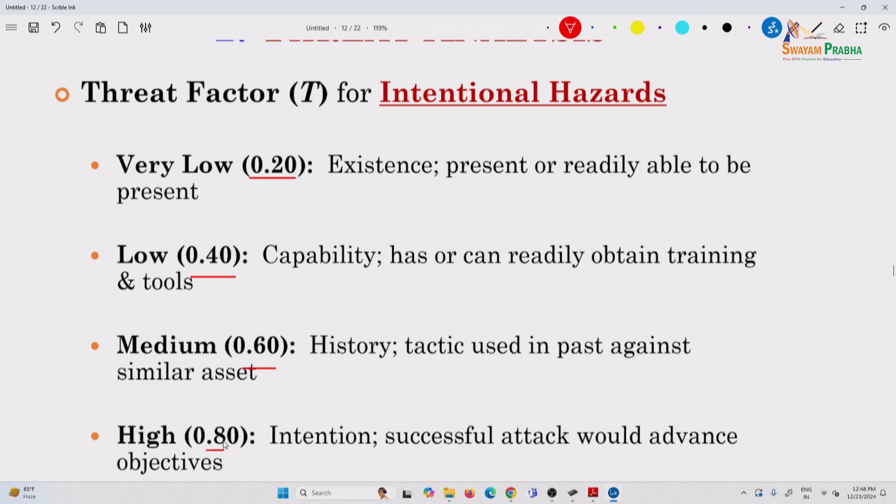And then you assign a threat factor. So here again, as you see, it's so subjective. It's just some numbers, 0.2, 0.4, 0.6 and 0.8, based on what you see, up to very high.

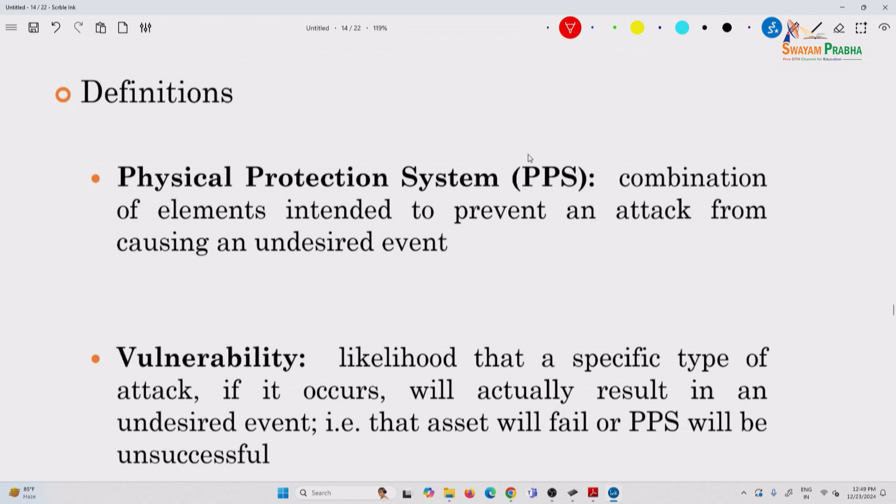So risk analysis is done even for normal threats as well. And then you do the vulnerability analysis, physical protection systems, a combination of elements intended to prevent an attack. And vulnerability is the likelihood that a specific type of attack, if it occurs, will actually result in the undesired event - that the asset will fail or the PPS will be unsuccessful.

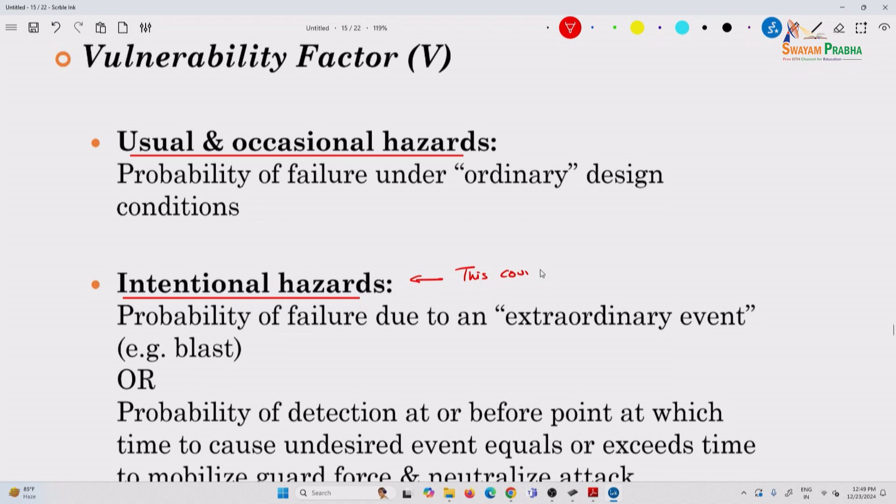So based on this, you calculate a vulnerability factor, for example for occasional hazards, and we are working within the structure itself. So depending on it, it's equivalent to the level of protection, so to speak, for that element, but based on that you can come up with numbers, and these will be provided for you, ranging from 0.05 to high.

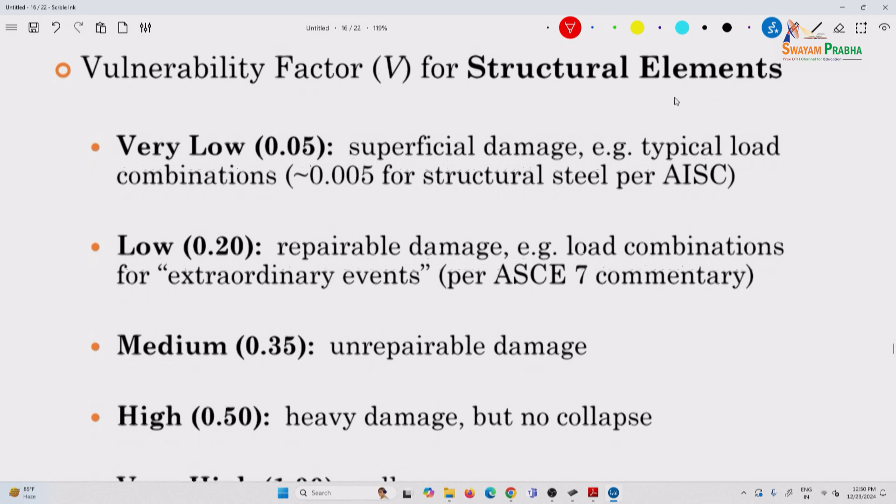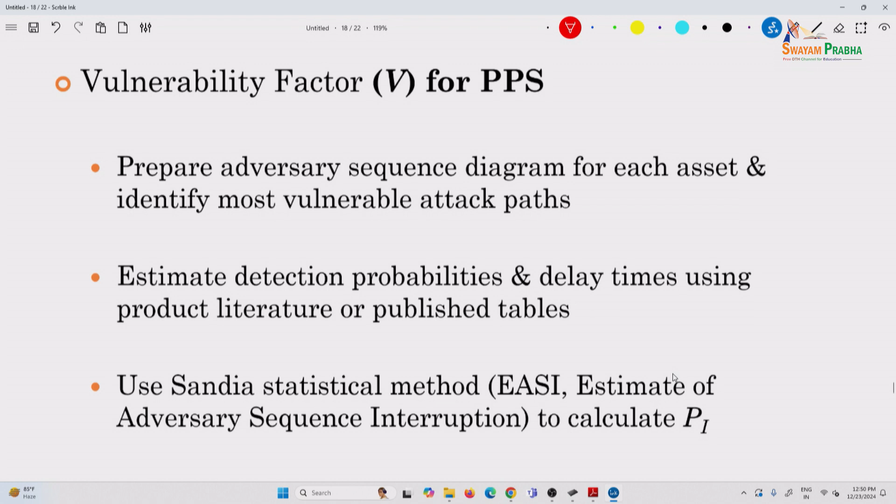You have some calculations here, then you calculate based on - if you go through in detail, we will go through a detailed example also - but you actually create a diagram for each asset and identify the vulnerable attack paths. You estimate detection probabilities and delay times using tables, and then you use methods to calculate the probability of interruption.

But here you can use these numbers, you can use these tables based on judgment, from very low to very high.

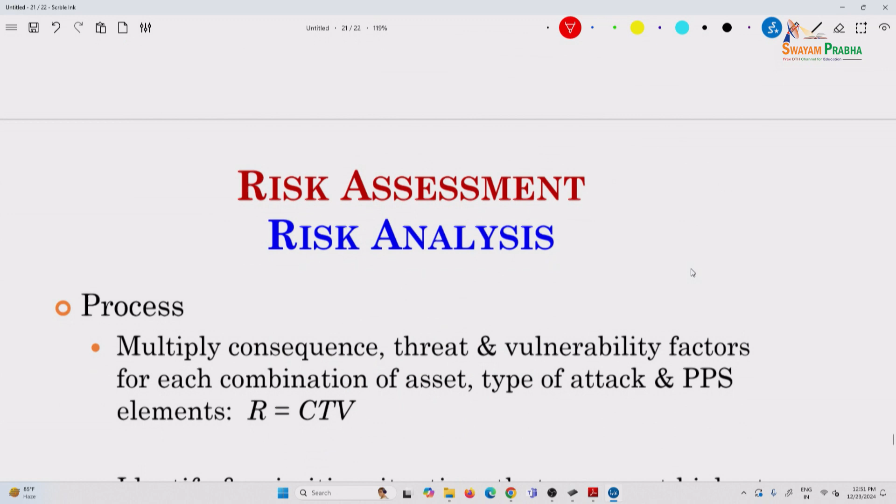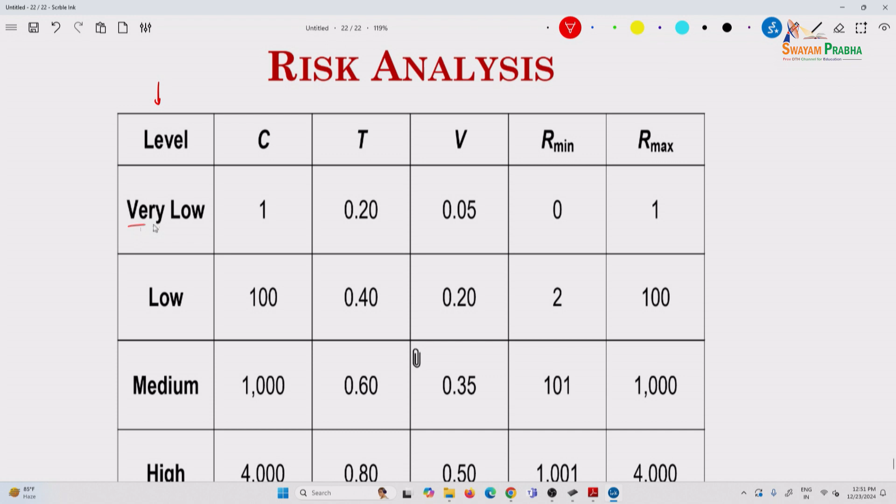So we saw that risk is a combination of C, T and V, and the product is the risk. And then based on this - this is the risk itself, whether it is very low to high based on the CTV products - whatever you get, you use this table to calculate the risk for that structure.

So this is a basic understanding, and you can try - the numbers of risk you get from different methods are different. That is why it is important to have a background in using a method and knowing what an acceptable risk is.

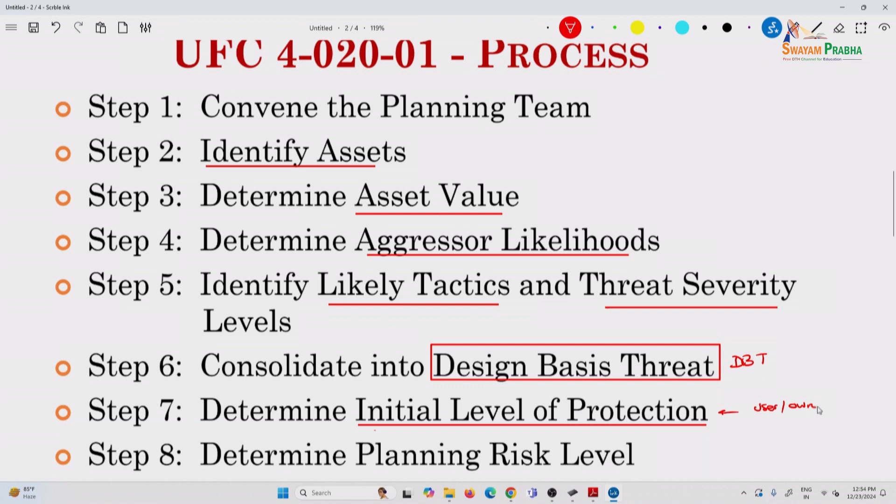Convene the planning team. Step 1, identifying the assets, then determining what is to be protected, determine the asset value, then determine the aggressor likelihoods. Each one has a number associated with it. Identify likely tactics and threat severity, then consolidate into a design basis threat. Then you determine the levels of protection that you need, this is from the user or the owner, and determine the planning risk level. There are equations associated with that.

So, here you do not have to copy down. We will go through it. I think we can do our example and let them do it also at the same time, or that may be good, right? Okay, in the tutorial we will go through this.

Identify assets. So, there is a section based on the facilities. This is just to highlight all the types of facilities that are there in table 3.1. What are all the assets they are assigned? This is table 3.2. Then the asset value is another section. There are up to 5 ratings that are based from table 3.3 to 3.8. Then you sum the rating factors and then you determine what is known as the AVR.

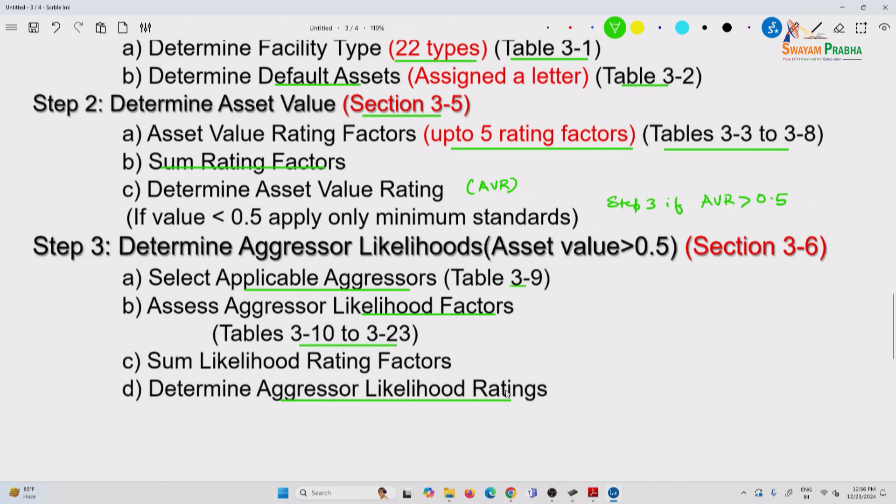Then section 3.7, you identify the tactics and threat severity levels. Again, these are the tables, the potential tactics based on the asset. Select applicable tactics based on the aggressor, then applicable tactic threat severity levels. And I have not shown you these tables, so you might be in the dark right now, but we will be going through all of it. Then all of it you consolidate into an initial - this is where the whole purpose is to define our DBT.

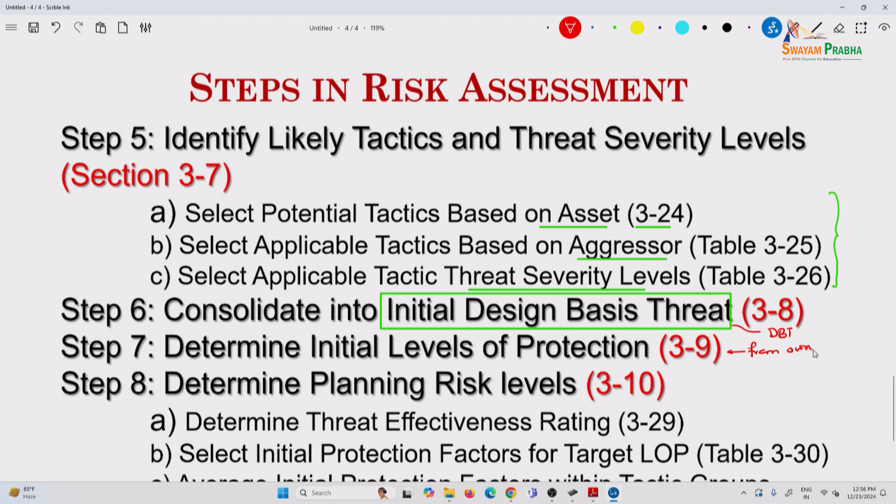And you can change based on that, there are a few categories. Then you determine the levels of protection again from the user or owner desired. Then based on that you calculate the planning risk levels. There is an equation for threat effectiveness rating, then the PI initial protection factor, this is P sub I for the target LOP, there is a table for that, and then you adjust, and based on that you calculate all of this, this is PI. So there is an equation here, it is a simple equation, all of this.

Then you calculate the risk level. Then you assess the acceptability of risk levels and identify user constraints, and incorporate design requirements into planning documents. So it is a fairly, as you see, very detailed process.

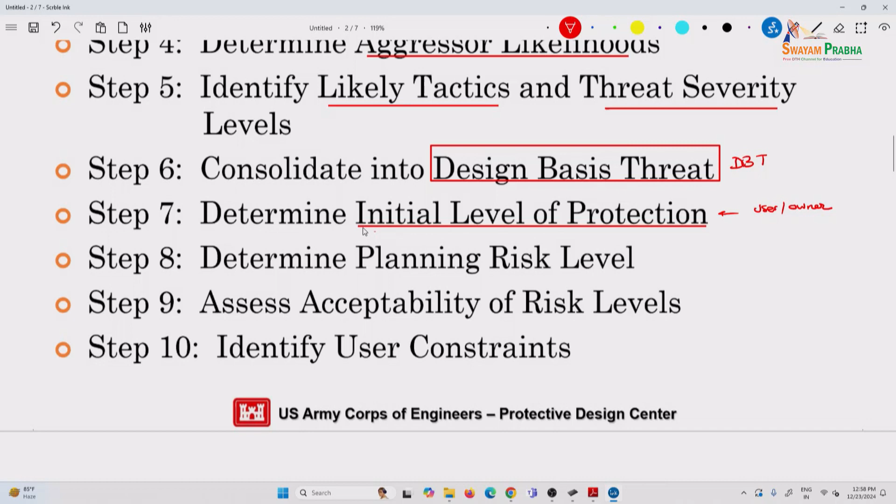And one more thing, I just want to show you and then we will be done, or maybe I will do one thing. Once we have done all of this, these are all different tables. So this is the vulnerability part of it. This is the equation that I wanted to show you.

You get your TLH depending on the types of aggressors, and then your PI average that you have calculated, the initial protection factors, level of protection, and then based on that the risk is calculated using this second equation. This is the average value AV TLH. This is basically the vulnerability part of it. Oh, I didn't know this can move. This is vulnerability.

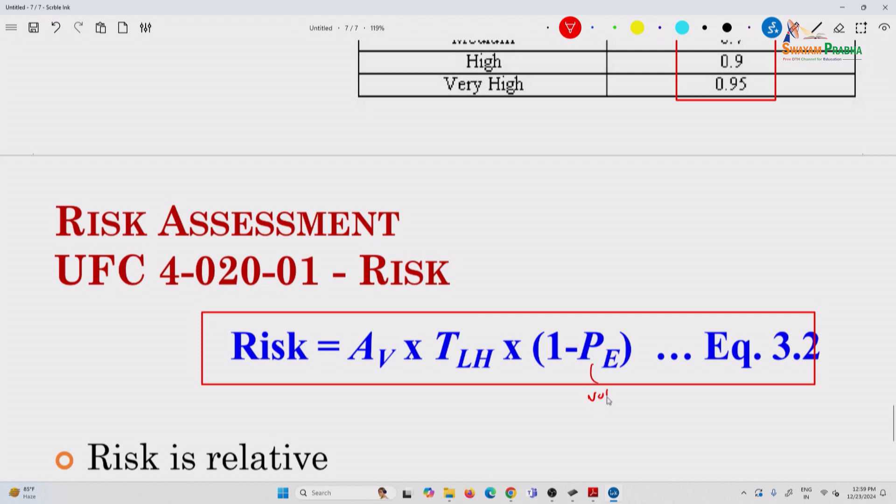So, risk is relative. If you are looking at your neighbor's answer, it might be way different, and both could be wrong, all right.